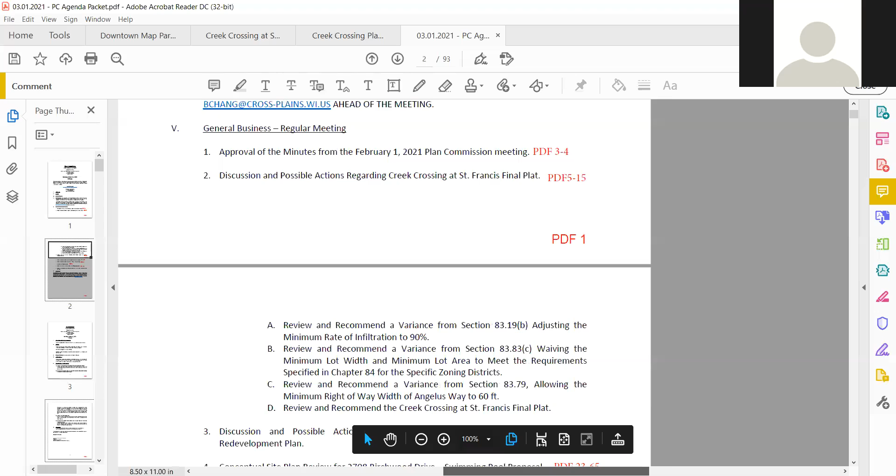Number 2, discussion and possible action regarding creek crossing at St. Francis final plat. We will go through items A through D individually, I think.

I can give a quick summary here regarding the submittal, and then we can go through each of them. As part of your packet, staff provided a list of items that do need to be addressed, but we found that the final plat was substantially in conformance with the preliminary plat.

That said, items 2A through 2C on the agenda are listed as variances. However, in speaking with our village attorney, I believe those are instead waivers. Our code doesn't differentiate between the two, but my understanding is there may be some connotation regarding that.

The final plat has been submitted for staff review. We've had an opportunity at the staff level to review the items, both the preliminary plat and the other submittal documents, including the developer's agreement, construction plans, and utility plans. As part of your packet, you'll see a list of recommended conditions or changes that staff recommends be fixed before approval at the village board level.

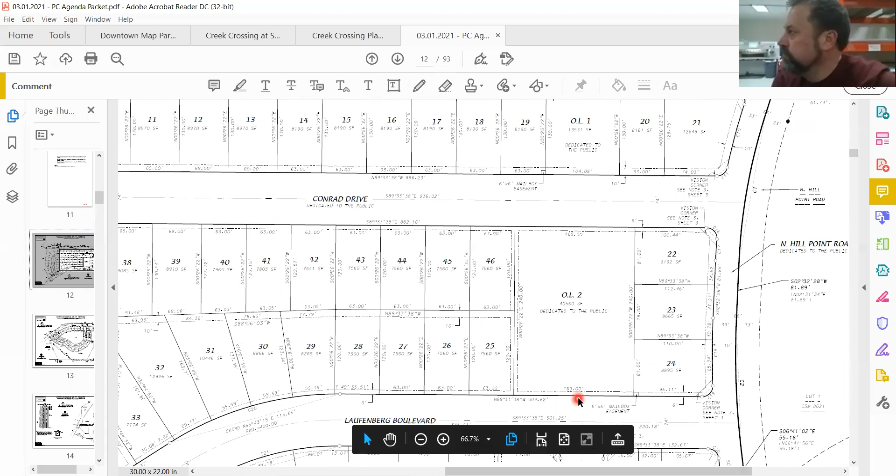I don't know, can I make a point of order? Can I say something? With what you're saying, Bill, aren't those developments zoned SR5, which means the minimum frontage is 60 feet, and is the square footage 9,600, or are you using the SR4? So the subdivision code minimum requirement is 9,600 square feet and 80 feet at the building. The SR5 district, I believe is 7,200 square feet and 50 feet width.

Oh, so this is falling into chapter 83 is what you're saying? So this meets the single residential 5 district, but it does not meet the subdivision minimum lot requirements. Oh, I did, okay. Sorry, I didn't know, I was just, thank you.

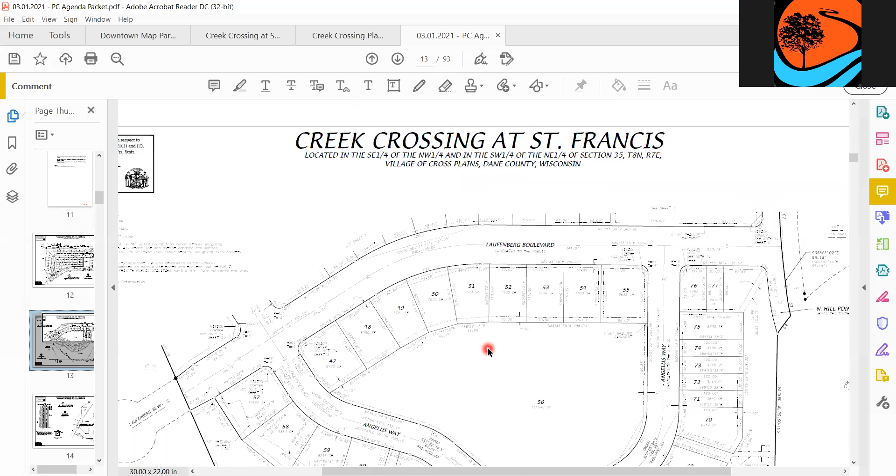Okay, Judy? I don't know if I can ask this or not, but I will. Is there any way that we know a rough cost that they're gonna sell the lots for? Like what we think a lot will go for?

Yeah, I don't know. We have Ron Kloss, we have Jeff Lee, and we have Vern Jesse on Zoom here. They may be able to address that question. Jeff or Vern or Ron, go ahead if you would like to address that.

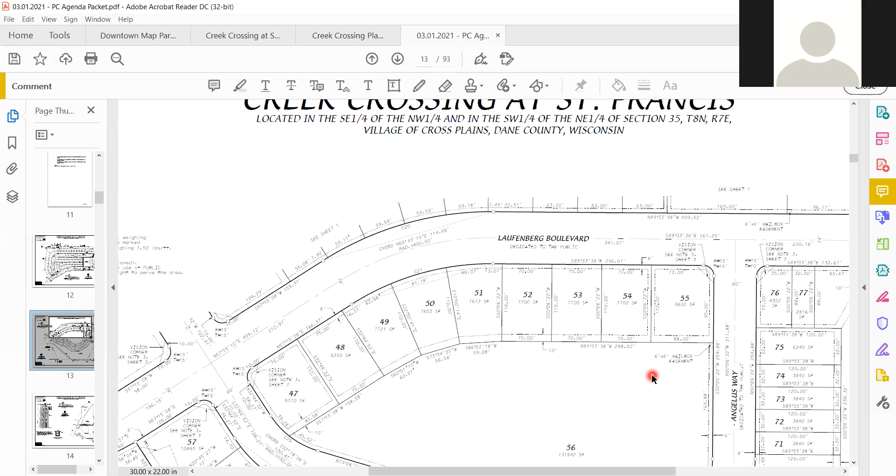Sure, this is Jeff. We are working through final pricing, but to be consistent with the market on a per square foot basis, these lots are suggesting they'd be priced in the low 90s to low to mid 100s. Thank you.

Anybody else? Comment? I don't know if that's classified as affordable, but I guess it's more affordable than the latest one that we just approved.

Yeah, I guess it's all relevant, but I would think with the setbacks and everything that'll be required, the houses will be smaller. I don't think you're gonna have a 4,000 square foot house put on this lot. It'll probably be more in the 1,200 to 1,700, maybe 2,000.

Which is really where the cost of the housing is. It also provides higher density. We get more people in a smaller area. It's good for the environment.

We do have Mike Slavny, our village planner, on here too, so he's available for any questions also. Wanted to know that. Anybody have any questions?

I don't object to the smaller lots, but is this something that should be looked at in the ordinance? I mean, if we're granting a variance to a lot of lots, maybe the ordinance ought to be looked at as to whether we're requiring too much square footage or frontage on residential lots. I agree, it's an inconsistency between the subdivision ordinance and the zoning ordinance.

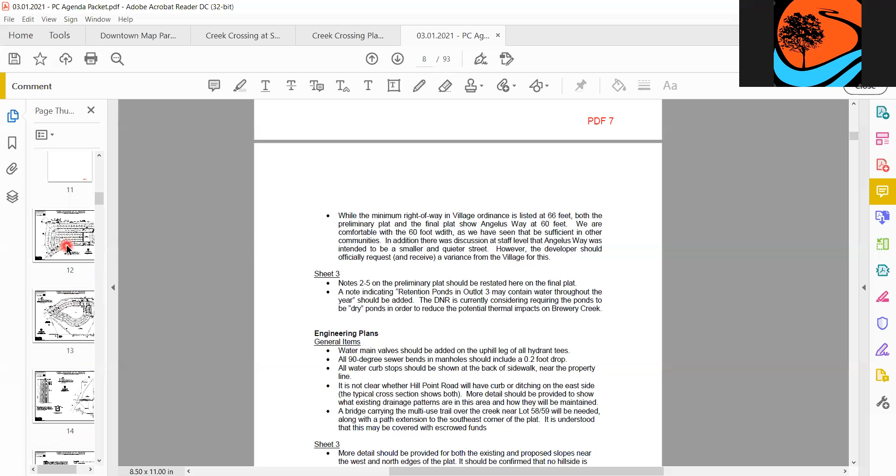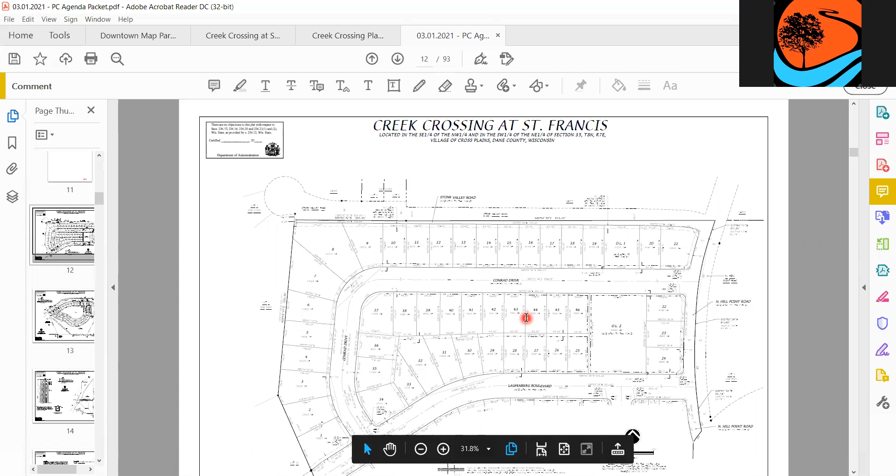Did you want to go through all 28 of those? I don't believe we have to. Brian Berquist, our village engineer, is here with us tonight, and so is Mike Slavny, our village planner. The packet did include the letter from our village engineer, which has been reviewed by staff, and we are in concurrence with that. I do have the plans and the plat, and I think the best way to do this would be to open it up for questions so we can get through this in a decent amount of time.

My whole thing is, I agree with all of these requirements they're asking here. I'd add that I know they mentioned about the retention pond being wet, but the DNR was talking about how they want them dry. But if it's going to be wet, and there's a chance of it being wet, I'd like that in the notes like we had on the preliminary plat. And I would like lot 56 to either be labeled or noted that it's going to be potentially multifamily. I do not want to run into what we've been running into where we're not clear on these final plats about what we're planning on doing. So let's get it on there so people know when they buy the lots. So those are my three things. Anybody else?

This is Kevin. I have the same thing about lot 56, so thanks for bringing that one up. I wish we could take it further, but I don't want to go backwards here today. I think we have to address it. I don't know if it's also addressed in the covenants, which get handed out to each home buyer, but if not, it should be, as well as the plat map.

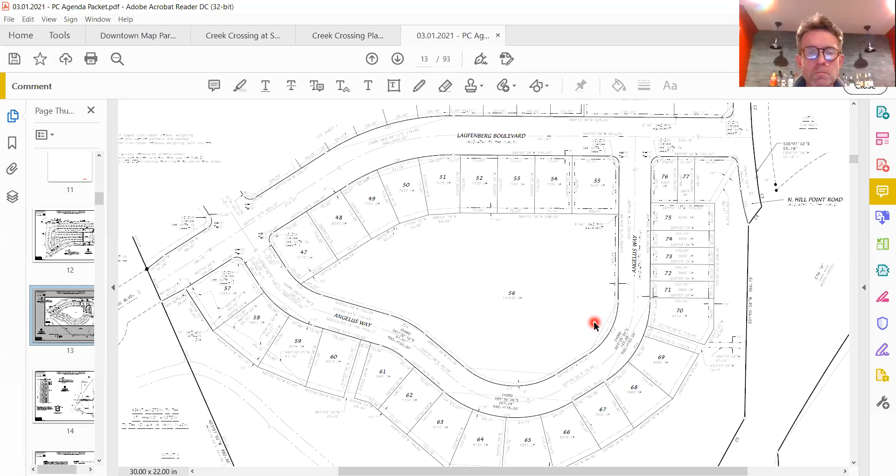So a couple of questions. Also, I had the DNR one - there you go. I'll skip some of the other lesser questions. Oh, and I'm going to mention on sheet 3, PDF 8, no construction traffic will be allowed to enter via Laufenberg Boulevard. I just wonder how that's controlled. So that's a question seeking an answer.

And I would agree with Michael's assessment about the traffic circle and decorative stone, trying to get something in there that's maybe a little nicer than decorative stone. I do understand it may be a hassle, a little bit greater burden to maintain, but I think it's worth it. And then I had a question about some sidewalk connecting - oh, never mind, I just want to reiterate connecting the sidewalk.

And that's it. Anybody else? Go ahead, Kevin.

Michael brought up the stone on the terrace. Could you answer that question, or the first one? You want to answer these questions before we move to the next one? That's fine, I was going to let them do them all at once. Oh, all right, sorry. No, that's all right. Okay, go ahead.

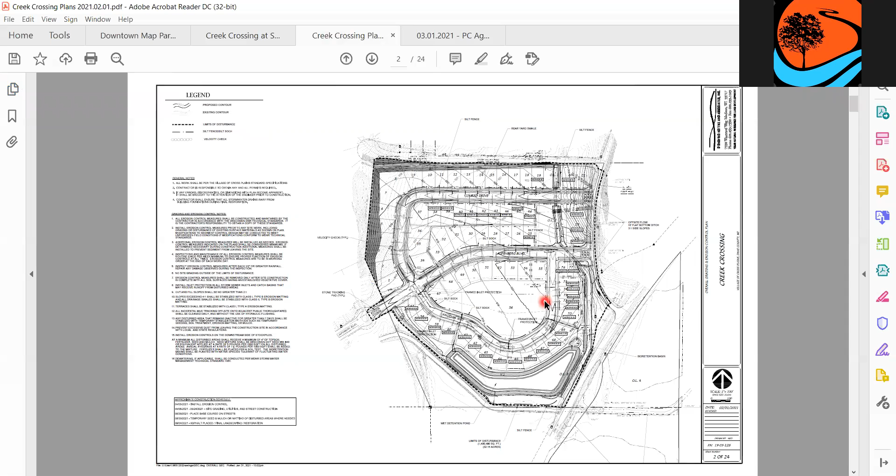Jay, would you like me to answer that? Go ahead. Go ahead, Ron, this is Ron Kloss. Yeah, this is Ron Kloss with D'Onofrio's.

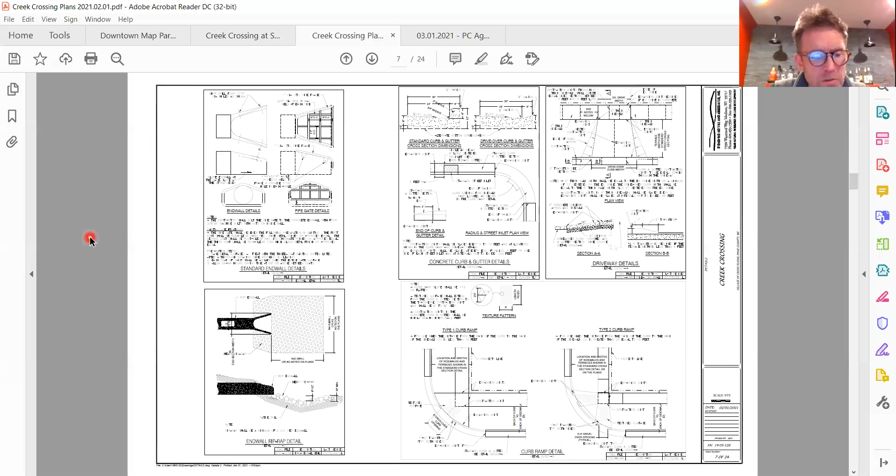We're doing the engineering for this project. The ribbon curb is a different design than what the village has used. In our discussions with village staff, Jerry Gray and Brian, there was concern that cars, as they parked along the road, would pull off beyond the ribbon curb and into that terrace area and rut it up. So we proposed a shoulder beyond the ribbon curb to help prevent that rutting. But our intent is to sprinkle a little topsoil on top and grow grass right up to the ribbon curb, so there's no actual gravel showing or to maintain. It's there as a base for when cars would pull off beyond that ribbon curb. So that's the basis for that design.

On the traffic circle, we're wide open to building that however the village prefers it. So just let us know.

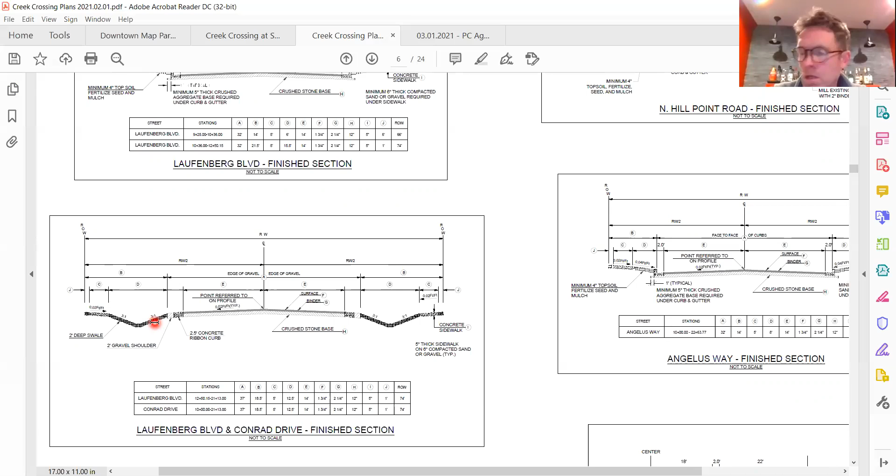And then as we review Brian's letter and those items, we don't have any problem taking care of those, other than we'd like to discuss that centerline radius on Conrad.

We are proposing a 100-foot radius on that curve instead of 150. The reason we went that direction is, as you look at the outside lots, they're already very deep on that curve, and lot 37 has a decent shape. If we go to a 150-foot radius there, it shifts the street 20 feet in the middle, so it would take a big whack out of 37 and make 7, 8, and 9 even deeper and more, I'll say, snouty. Those outlines would be extended, especially between 7 and 8 - that'd be another 20 feet long.

And we look at speeds here - to me this is really no cut-through traffic, very low speed. So we'd like the village to consider a variance on that. By the way, this is not a change from the preliminary plat, but now is the time to analyze it and decide.

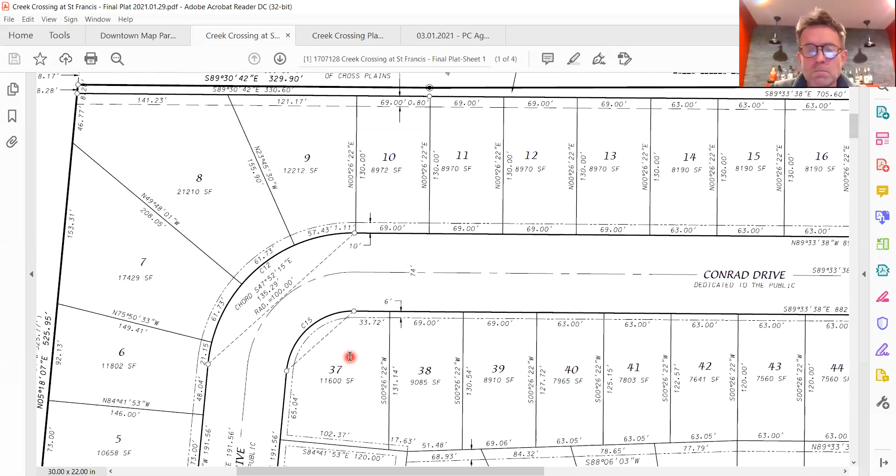What we had anticipated is that there would simply be barricades brought across the entire stretch during construction to prohibit errant deliveries or the random truck driver from using that. The intention of the comment was more to not put a stone tracking pad there, which would further differentiate that from an actual entrance. So that was the intention - there would actually be barricades placed there and not have a stone tracking pad, which you would normally see at a site entrance.

Okay, thanks. I guess then I misinterpreted - I mean, this is construction during development, Brian, you're talking about like roads and sewer, and not during home development. Is that what I'm hearing?

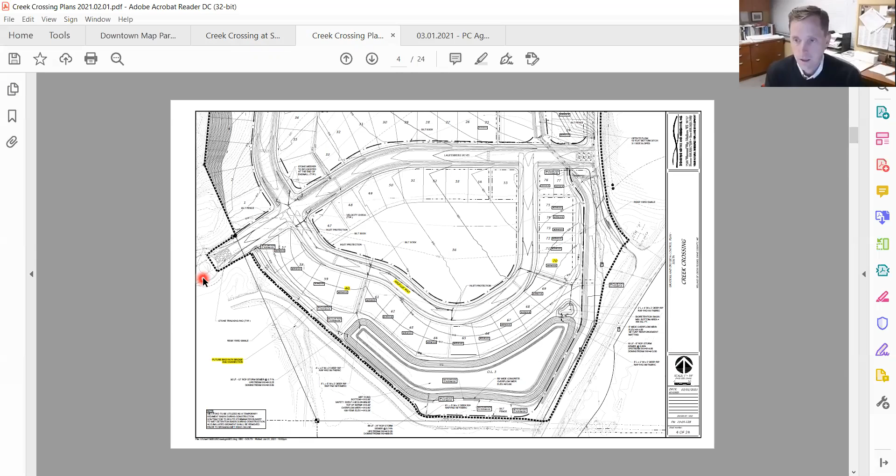Yeah, I don't know how you'd prevent it during home construction. But I was wondering, okay, infrastructure construction - could we just clarify that it's development of the subdivision and not development of homes? During construction of the subdivision and not during construction of homes? Because I think, I don't know, maybe I'm not the only one that was confused. Sure, thank you.

Anything else? Okay, Todd, go ahead. Well, there's the gravel on the side of the road. That's what I was asking about. Oh, okay, so you understand. If it's gonna be covered with dirt, we're assuming the homeowner will try to keep it up. I think that's a good idea. I think we get a lot of calls if there's ruts in people's yards there, they have to fill them in.

All right, any other questions on this? Hey, I guess Jeff, Ron, I just want to make sure when this comes to the board, all these points will be added, this will be all modified, so we aren't having a million contingencies. That's three weeks from now.

Yes, Jay, that is our plan, and we also plan to incorporate the desires we learned from the DNR on the stormwater ponds. We hope to have those incorporated in the plans as well by the village board. Again, the only item that remains in our minds is this radius question.

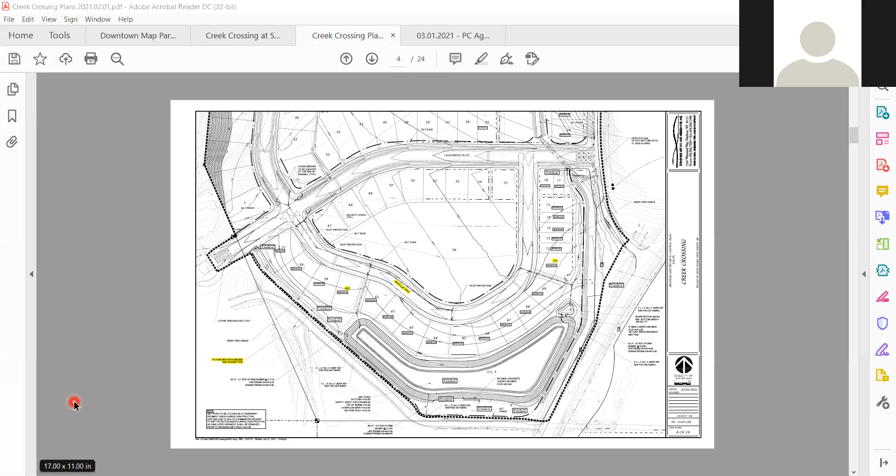And since that is not a departure from the preliminary plat, is this something the plan commission should discuss? Should we work through it with staff? What's your desire on the radius question? Well, that's good, because if that's what we're left with, I think I'll just go around and see what people's feelings are on it, so we have some idea. Everybody's, Jeff? I mean, Kevin?

Yeah, I leave it to engineers, really. I'm having a hard time trying to decipher what it would look like live, other than my hope is that it would possibly keep people moving slowly. And then secondly, I remember what lot it was on the corner, the inside corner there, that there be some sort of restriction against putting up trees or other obstructions in that inside corner, so you could see around it. We don't have to deal with what we're dealing with over here.

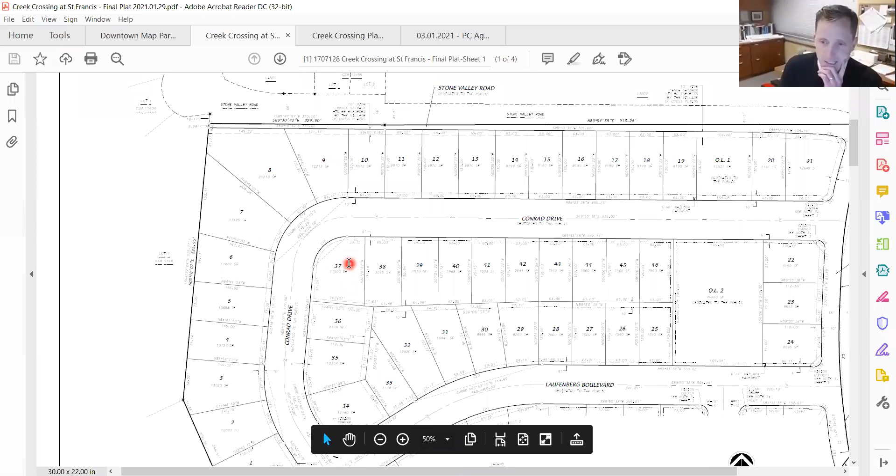Yeah, lot 37. Lot 37, thank you. So I don't know what that dashed line means, but it seems like that could be similar to a no tree, no structure type zone. Yeah, that dashed line is just a geometry feature called a chord that connects the two ends of the curve. But to your point, the village does have a vision requirement at all street corners already.

That is an excellent point. It needs to be kept at the forefront, but you already have, I shouldn't say vision corner, you have planting requirements on corners as well in your code. But we can certainly add that on the plat too, as Bill is showing it right here.

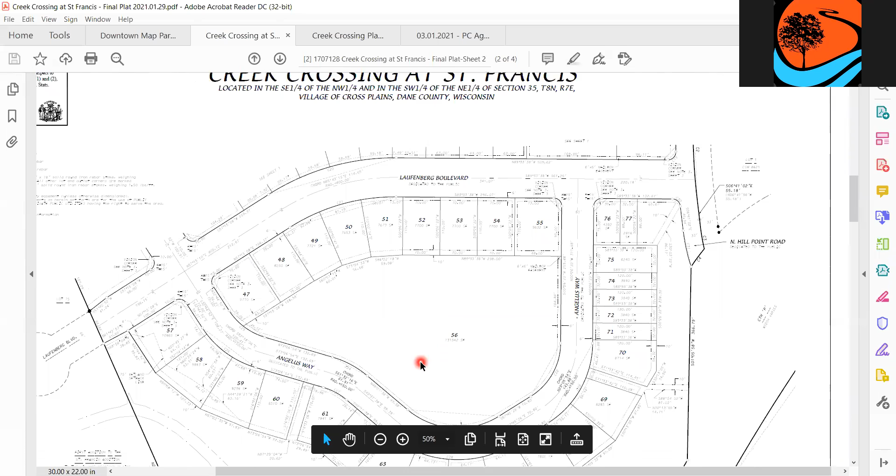All right, Cliff? My concern would be whether or not, like emergency vehicles, if there is parking on one side of the street, that if in fact a case happened where one of the larger fire trucks or pieces of equipment need to get into that area, is that a concern? And I would want someone from the village to acknowledge whether it's safe or not.

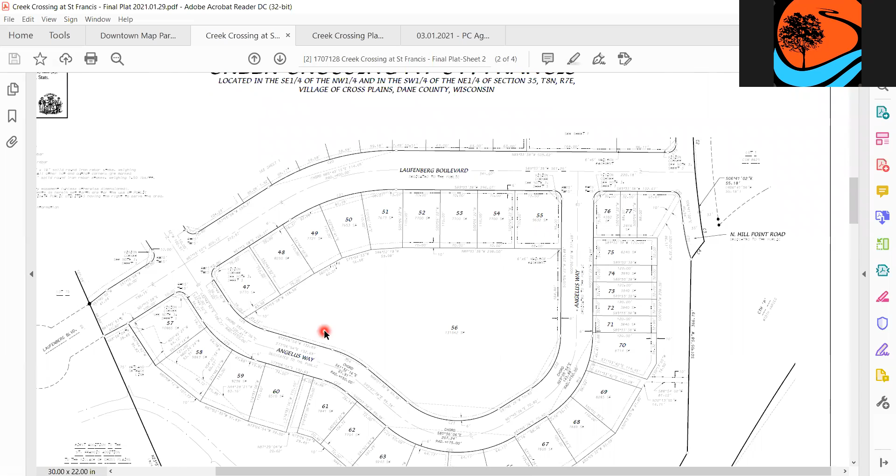Right. But we're only looking at parking on one side of the street on Angelus. That's Conrad. Oh, they're, technically, so that, okay, that technically could have two cars on the sides of the street. Well, technically it's a corner, you have to be 20 feet from each corner. Okay, but anyway, that's a different story. I think what Cliff is looking at, the road is still 66 feet, it's just, you're talking about kind of a truck, a sharper radius. Yeah. All right, I don't know, we'll have to check into that, that's a good one.

Randy? I'm all right with the 100 foot. I like the idea that it might slow the traffic somewhat, which has been an issue we've talked about. And so I can live with the curve, although I think the idea about the emergency vehicles is a good point.

Todd? I'm fine with it, it'll slow them down. All right, Judy? I'm good with it, slow it down, but that's a great point, that's a great point. Well, it looks like I'm agreeing with everybody. As long as emergency vehicles, especially fire trucks, can make that curve, it sounds like we're pretty much okay with that. So I don't know who actually makes that call, Bill?

Yeah, so the process for a waiver does require, from the subdivision ordinance, a motion by the planning commission recommending it to the village board. Right, but I don't want to recommend it until we know, I guess we could do a contingency, but who actually can make that determination? That would be an engineer, right? Yeah, we had an engineer and or also the fire department.

We have seen in other communities where their minimum radius is 100 feet, like in Dane County. So it was more to call that to the Plan Commission's attention that that's what your ordinance says. But we do work in other communities that allow 100-foot radii, and it does work with emergency vehicles.

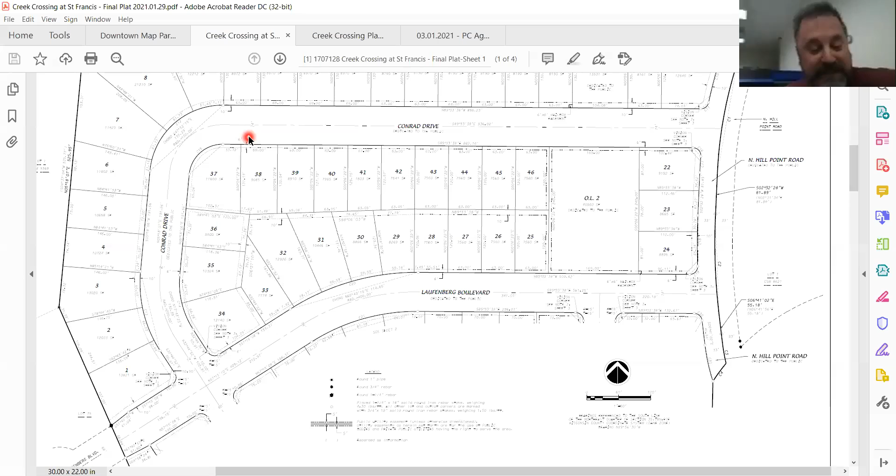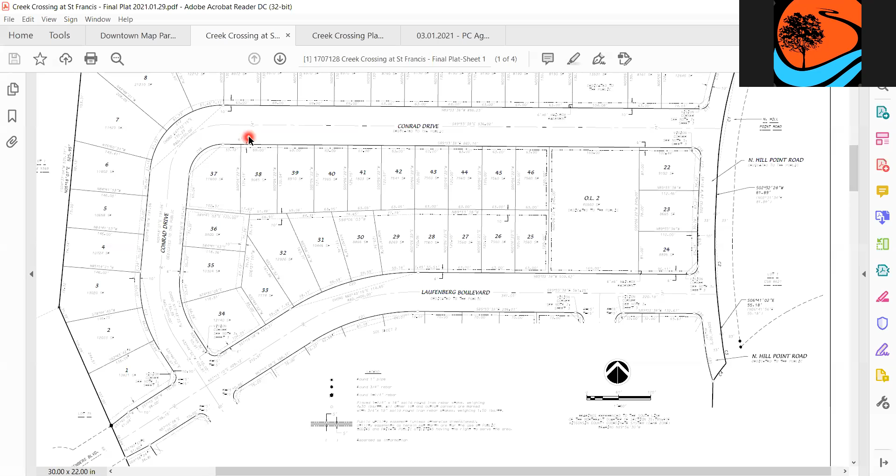Commissioner Padre? Yes. Eric, did you have any questions or comments? I do not, I don't have an opinion. Commissioner Zander? Yes. Trustee Lucius? Yes. Trustee Campbell? Yes. Commissioner DeQuinn? Yes. Commissioner Case? Yes. President Longo? Yes, and sorry about not hitting you, Eric. That's okay, I had nothing to add.

All right, is there anything else we need to do? Jeff and Ron, you're gonna do something with lot 56, either putting it on the plat or doing a note? The plat already calls it out as being likely 8 unit per acre density, but if we want to add additional comments, we can. Okay, are those comments in one of the other documents, or is it gonna be a note on the final plat?

At this point, it's a note on the final plat. Oh. Okay, that's good, I couldn't find it on it, but I might be missing it. But okay, very good. As long as it's somewhere on there that we can point to in the future that's what it was gonna be.

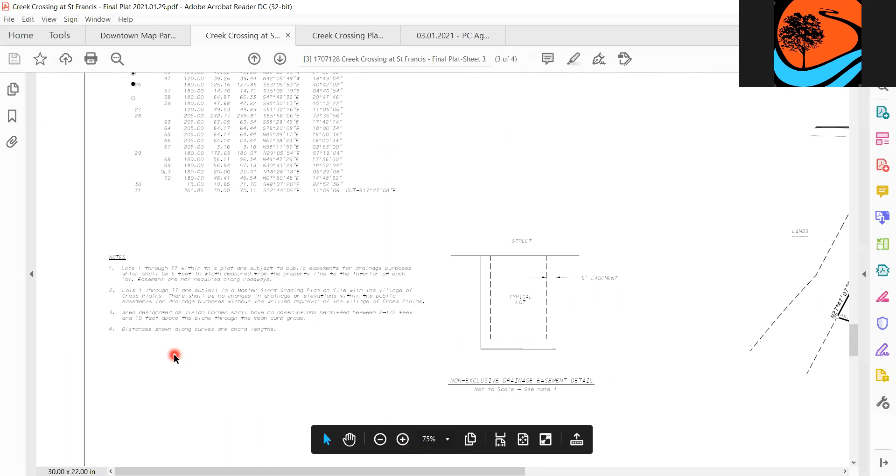Bill, can you, I know it's a comment on the preliminary plat. I assume it's followed through into the final plat, but we will make sure it's on there. Okay. Yeah, we can see it on the final plat. There's a couple more notes that weren't followed through on the final, so we can work with that.

All right, Bill, is there anything else we need to do here or anything else you need? No, I think that answers all of our questions. And so the action that we'll need from the planning commission will be to recommend it with these fixes. All right, do we have a motion?

So moved. Second. All right, I have a motion. I'm just gonna say what the motion is: to recommend approval of Creek Crossing at St. Francis final plat with all the stated additions added. Is that addition?

I guess it's my motion, so I can comment. Yeah, I just want to make sure that, I mean, there were a lot of issues that Town and Country Engineering found, and I guess I'm presuming they're all addressed. So my approval on this is that those, in fact, are taken care of.

Yeah, so what we're gonna do here is, if it is recommended by the planning commission, work with the developers and get it on to the final plat before it's presented to the village board. We would not present the final plat to the village board unless these items are in there. All right, I just want, because the recommend of the final plat that we have, those are not on it, so I just want to make sure that they're gonna be on it. Yeah.

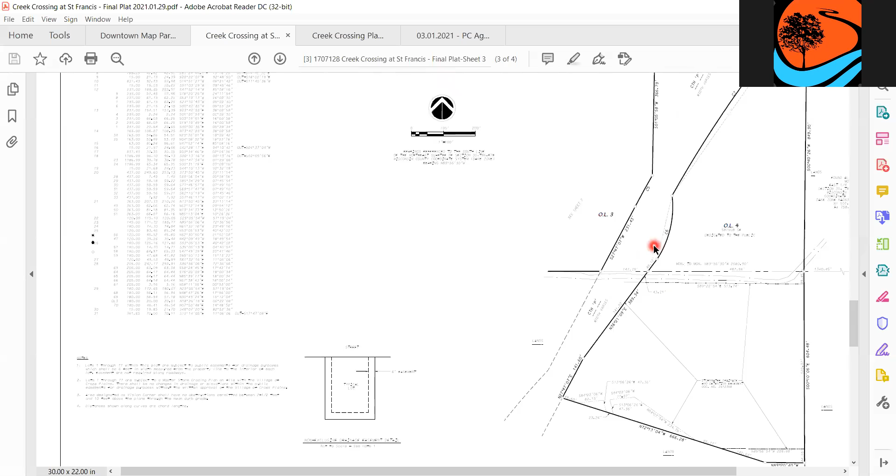I think we're kind of getting deep into the weeds, because I thought we pulled this out of the final plat, the circle. I thought that was an individual item, you know? I know we talked about it at one time, it's not part of that development, they're just gonna do it. Yeah, so the construction of the circle itself is not part of the final plat. It's part of the design plan. Okay, need to differentiate between the two.

In regards to the plans, and Brian can step in here, but we're pretty close on those things. The items in the street and utility plans can change and have in the past changed, because of items that we don't foresee, and if they are large policy decisions to be made, we'll bring the final street plans and construction plans for review. But whether it's pavers in the circle or whether it's grass in the circle, that's something that we can make a determination on.

Right, I'm trying to keep this clean, so right now we're just talking about the final plat. That's something outside of that, I don't want to confuse things here. I was just confused because it was on the construction drawing inside. Right, no, we can bring it up, I'm just saying right now what we have in front of us is the final plat, so we don't have to deal with that right now.

Well, I'm sorry to get it messy, but I do want some clarification, because we passed it with all the recommendations in Brian's letter. Brian's letter specifically states the traffic circle and trail be either decorative stone, pavers, or colored concrete. That's in his recommendation. So we're saying if the final plat passes, as long as they make the recommended changes, that's one of the recommended changes? Well, that's not how I'm reading it.

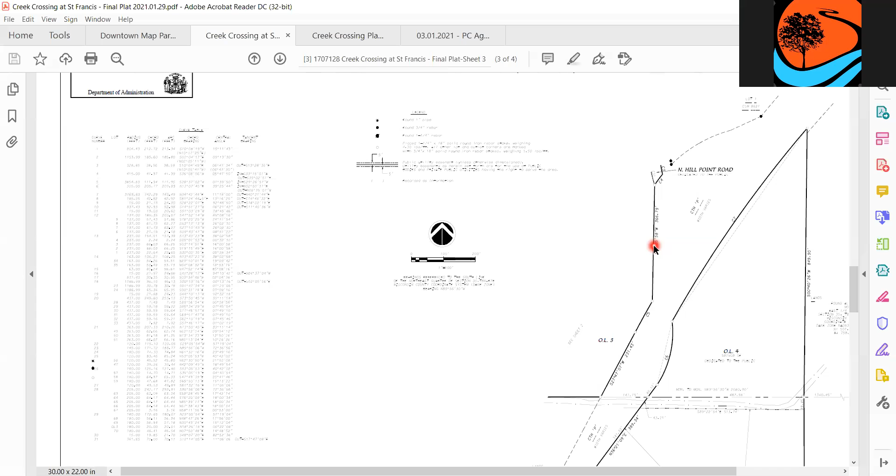We are going on to number 3, discussion and possible action regarding 2100 American Legion Drive concept redevelopment plan.

Want me to provide a presentation on this first? Sure. So this is a project located at 2100 American Legion Drive, on the corner with Main Street here in Cross Plains. Property owner is Tom and Robin Rockus.

They are here also with us on the Zoom meeting. They have proposed a redevelopment for this property. The very top floor, the second floor, would be an Airbnb-type setting where they would rent out to up to 6 people. Main floor would be an entertainment space or assembly space intended to fit up to 99 people.

They are also proposing a 10 by 25 foot deck over the lawn area that faces American Legion Drive as part of their entertainment space. As part of the packet, you do have the site plan and floor plans for each of the floors. The first one is the top floor, and you can see bedrooms and studio space. The second drawing here would be the main floor with assembly space, bathrooms, and the deck. And then the lower floor would be for the business and storage.

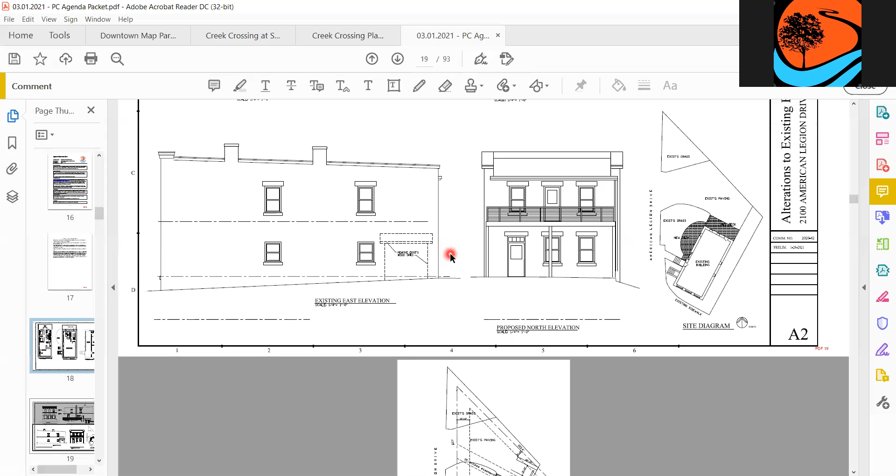When this plan was reviewed, or this concept was reviewed by staff, generally it would fit the Main Street business and architecture. However, there were questions in regards to parking and being able to access the site. You'll see here that the property owner has submitted two concepts for parking arrangements on the private property itself. So I'll let Tom and/or Robin take it from here and provide where they are at with this, and then the planning commission can take it from there.

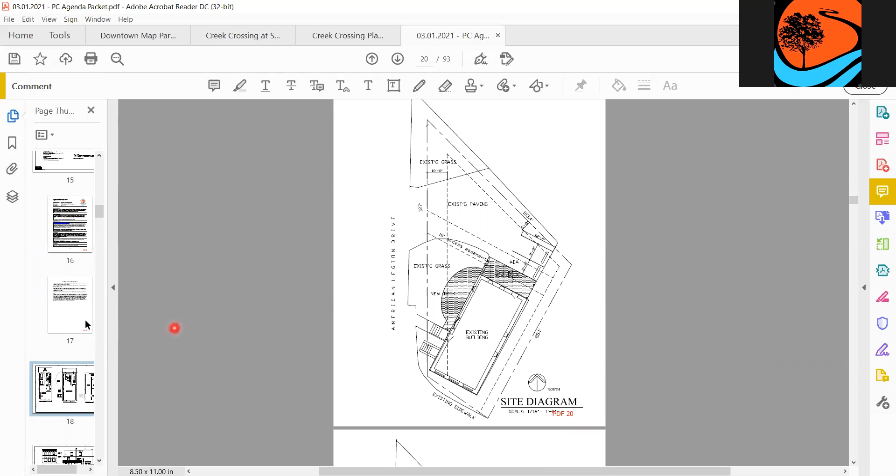Tom or Robin, if you want to go ahead and unmute yourself, we can have you get started here. Sure, yeah, hi everybody, I'm Tom. Robin Rockus over here to my right. Bill summed it up pretty well.

I specifically, well, we would just mention parking. I did give two options, because one is if we are required to back up to do a U-turn in the property, as she's showing here, this would somehow - the architect said this would be a Y-turn type exit. And then the other one shows kind of how the building has been used, where people just back out. And then it would give us an option to use this patio area here, which we would hope to do.

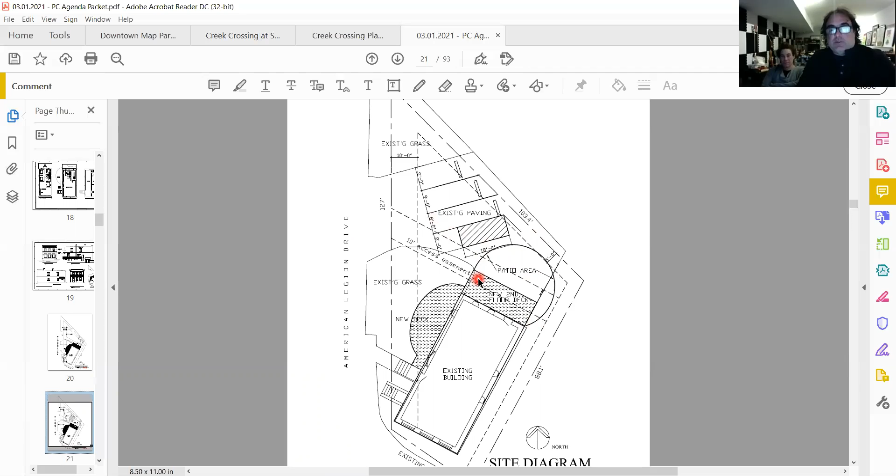So we were hoping to be able to use this version because it seems it would just be more appropriate. The other version would have one space with one ADA compliant space, so that kind of leaves us with one space. So we might just waive that if we're stuck with that, waive parking. I'm not sure what else, if anyone had any questions or what you were hoping me to address, Bill.

Sure. Mike Slavy is also on the line here, Mike and Jerry Gray, our director of public facilities, Brian Berquist, our village engineer, in regards to concerns with parking in this area. This does get congested. American Legion Drive is one way through this section here, going from south to north. And then 1909, right next door too. So we have heard in the past complaints about the traffic congestion here in relation to parking spaces. I guess the big concern here is an assembly space of up to 99 people, plus your Airbnb of additional 6. Question becomes where do they park?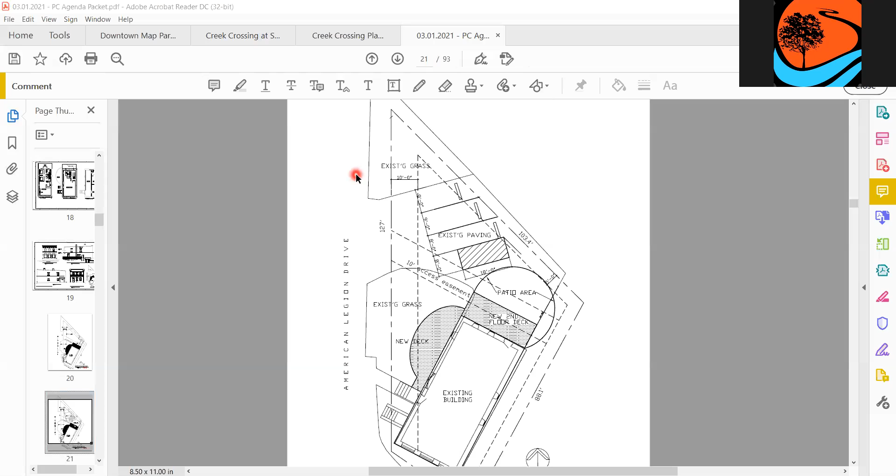Sure. We have thought about this quite a bit. So it's up to 99 people, that doesn't mean that our events will regularly have 99 people. We're going to be starting out with smaller events, and if we were to have, let's say, maximum capacity for a wedding or whatnot, we would encourage our clients to use a shuttle from, say, a hotel in the business park there in Greenway, and then have them shuttled to the event.

I did drive around recently and kind of eyeball all the parking spaces around the memorial, the Veterans Memorial, and just the streets in general. And it seemed like there was quite a bit of parking actually. So I was kind of relieved to make that assessment.

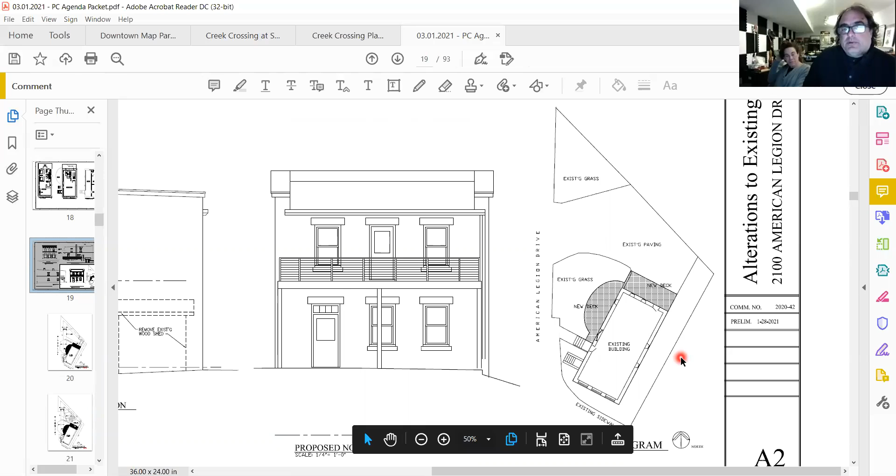Yeah, so we're concerned about parking for the bigger events, but I think that we're still going to be okay, and with weddings and whatnot, I think we would be utilizing shuttles and other creative ways of getting people there, so they won't be bothered by not finding parking. Even though I think there's enough parking, honestly, for me to walk. I can't speak for everyone else that might want to walk from the back end of the Veterans Memorial. But I think there's quite a bit of parking up and around that area.

Okay, does anybody have any questions? How much parking would be required by ordinance for this use? So in a Main Street mixed use district for which this property is in, it does not require any off-street parking. Off-street parking is waived. The proposal for this development would be coming in as a planned development, which would require a zoning amendment with the Main Street mixed use as the base zoning for that. All right, Judy?

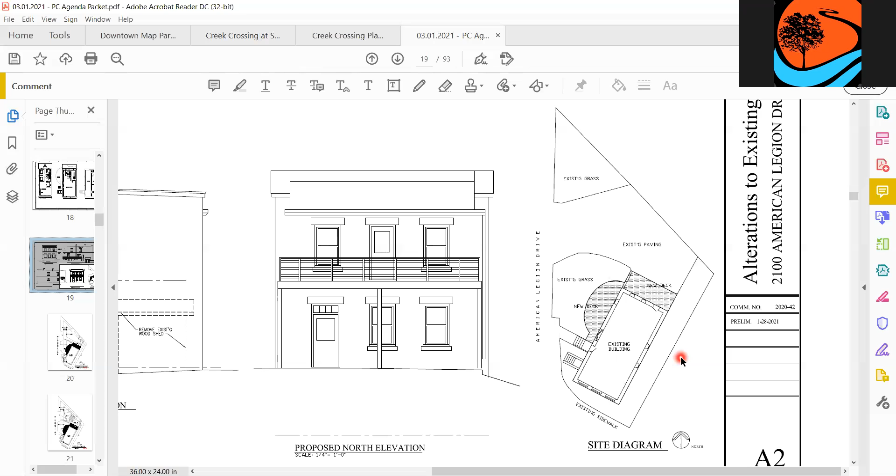Personally, I thought the same thing when the wine bar went in there. They didn't have a lot of parking either, but people find it. People walk, people get there, and they do great. So I feel like this is kind of the same thing, if we did it for them. This is just across the street.

I guess I got a couple comments on the parking. What I guess I would do is reach out to the Legion post there. And when you have events, maybe have a deal where people can park in their parking lot, because like you say, it's only about a block and a half. So that would be something that you might want to do, is work out a deal with them. That would give you probably 20 spots or more.

And then the other is in your letter, you have the top floor listed as bed and breakfast, and then in the memo it was an Airbnb. And I thought at our last time we talked about this, that if you classify it as a bed and breakfast, you actually have to serve the breakfast part. And I know there's restrictions on how many days for an Airbnb. I think your concept is great for short-term rental, I'm just not sure why we're not going with something like that unless something has changed. Just wanted to clarify so you don't get stuck on something like this.

Yeah, I appreciate that. We did go over that, and that's not the most updated version of the document, but the most updated version does refer to it as a short-term rental, like a vacation rental house or an Airbnb. So yeah, we won't be pursuing the bed and breakfast. All right, very good. So I want to add a couple comments here. So once it does get past the conceptual stage, that would be required to submit an application which would verify exactly what they desire to do on the property.

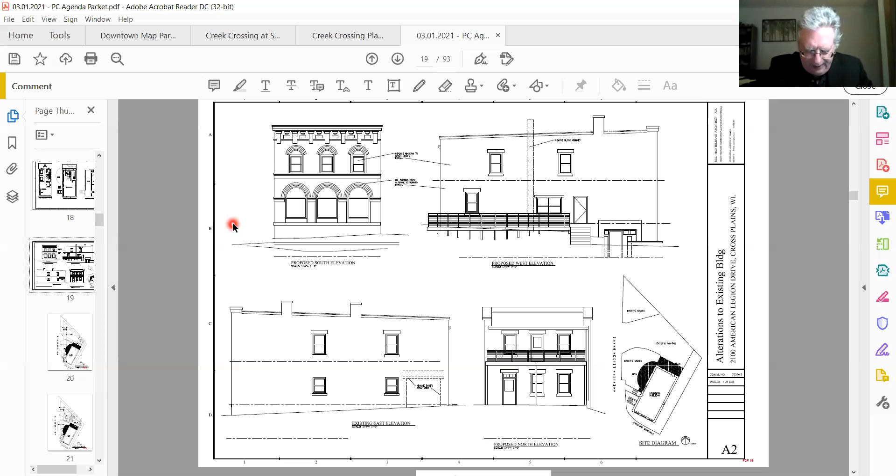I guess I'll comment, we have lots of people who back out onto Church Street and other streets that have far more traffic than this road. You can only go from Highway 14 to Park Street, you can't go from Park Street on American Legion onto 14. So you've cut almost all your traffic. Really, the only people who turn there a lot of times are the ones going to the post office, because they can get in there. So I think the traffic is extremely minimal there.

Backing up is always more unsafe than coming out forward, so that's a given. The question is balancing the positive of having the parking spots and backing out versus having half as many and going with a wide turn.

Okay, I guess we've got Jerry, then Brian, and then Kevin. I'll go next. I don't really see a big problem with the backing out.

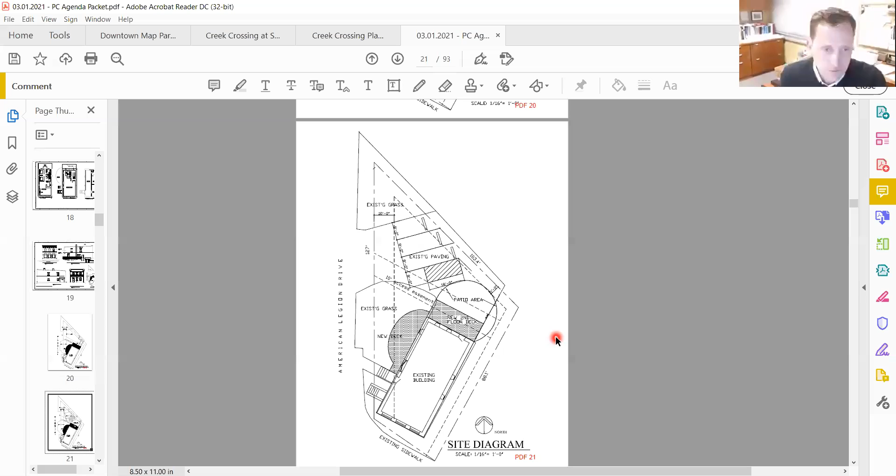I don't have anything to add on the parking. I agree, I don't think it would be in sufficient volume or speeds to cause significant problems. Thank you, Kevin. I was just going to point out it's three spots too, and presumably restricted to whoever is staying there, or somehow restricted. So I think the traffic is infrequently going to be backing out of there.

All right, so what action do we need since it's only conceptual? Comment? Yeah, go ahead, Aaron.

I just think this is kind of an exciting thing to have another one of the old historic buildings on Main Street get some time and effort put into it. I'm glad that Tom and Robin are making the effort to try to get a business going there. As far as our Main Street goes, I think we're gaining a little momentum and starting to have some cool stuff on there. So I greatly support this project.

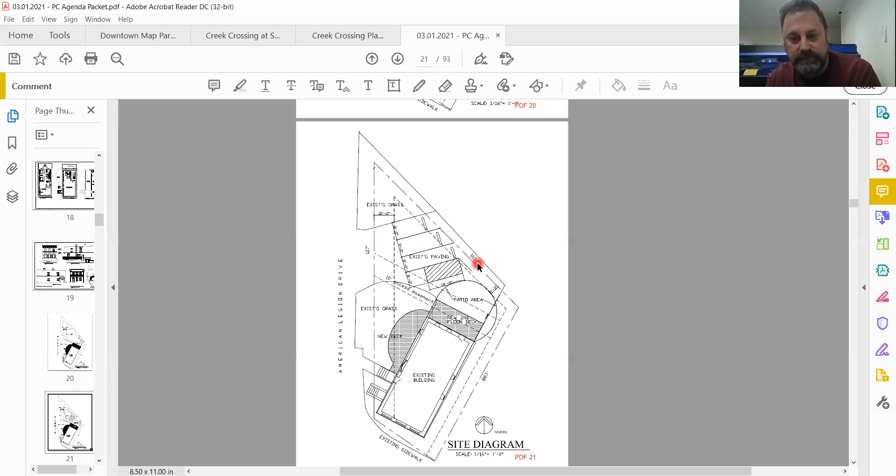Okay, do I have a motion? A motion. All right, do I have a second? I'll second. All right, I have a motion and a second. Any other discussion? All right, all in favor, say aye. Aye. Opposed, same. So moved. All right, thank you very much.

All right, let's go with conceptual site plan review for 2708 Birchwood Drive swimming pool proposal.

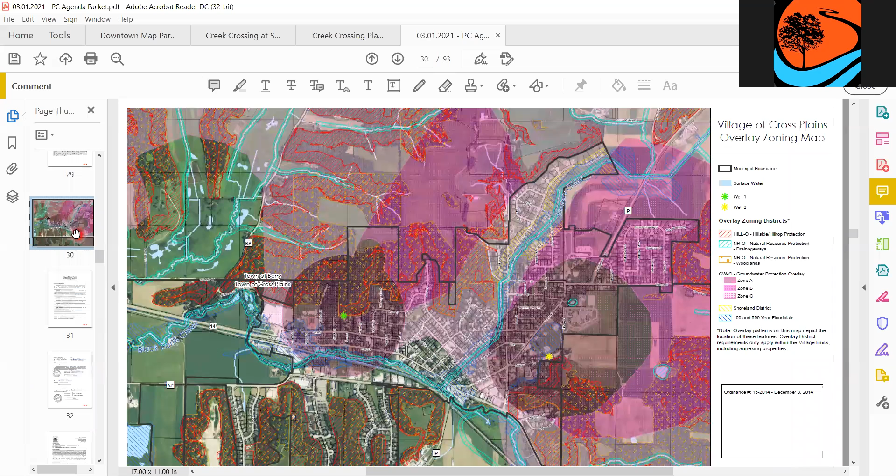I will first start off with the location map of this property so that everyone is on the same page. This property is located in the southeast section of the village, and this property is co-zoned, meaning it's got two different zoning districts. This portion here is residential, and this portion is hillside and conservancy. The whole property has a hilltop overlay on it.

There is some significant history regarding this property, in that there was an initial developer's agreement in, I believe, 1996. The property actually did not have a home built on it until, I believe, 2014. For that development, or the construction of that home, the property owner was required to obtain a conditional use permit to construct a residential home.

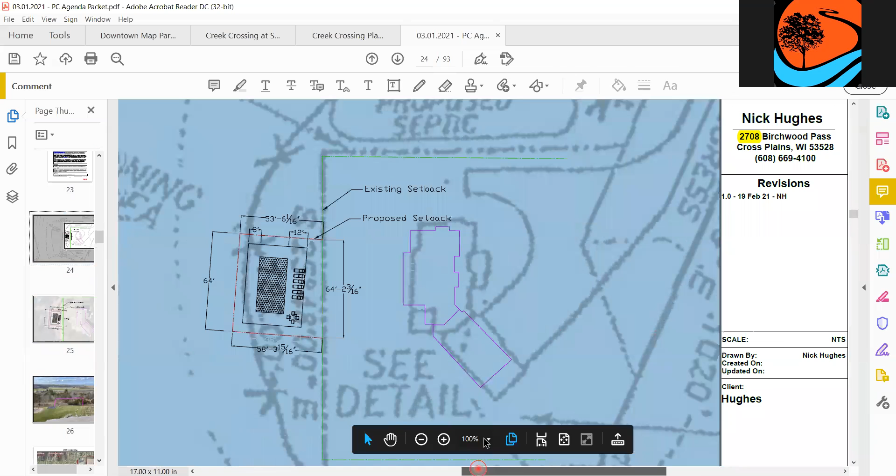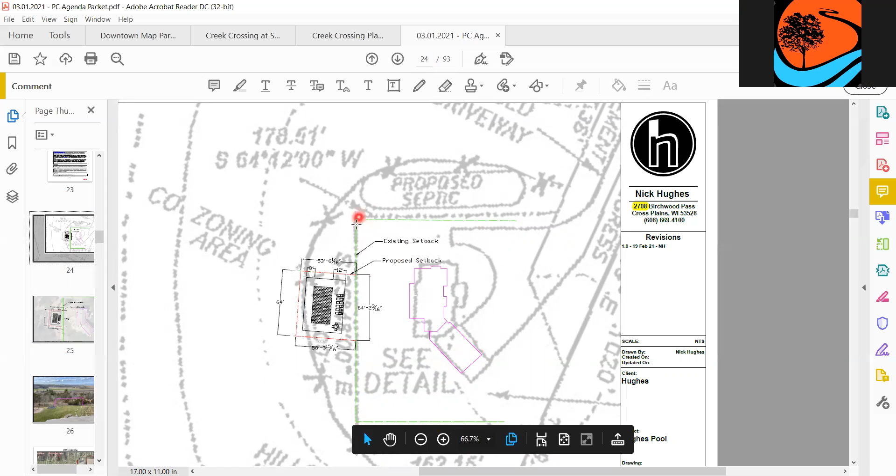So here is the current site plan, which is hard to see, but this highlighted in purple is the home. This green line is the boundary between the two zoning districts, so everything on the east side is residential, and everything on the left-hand side of that line is conservancy. Okay, so where's the hilltop overlay, what does that cover? The hilltop overlay covers the whole property. The hillside protection preservation line is outside of that area, so that comes along this section here.

And so the property owner is asking, or would like to construct, obviously, the swimming pool outside of the residential area. In our zoning code, a swimming pool, or residential accessory uses, would not be allowed in the conservancy district. It would be allowed as a permitted use in the residential district.

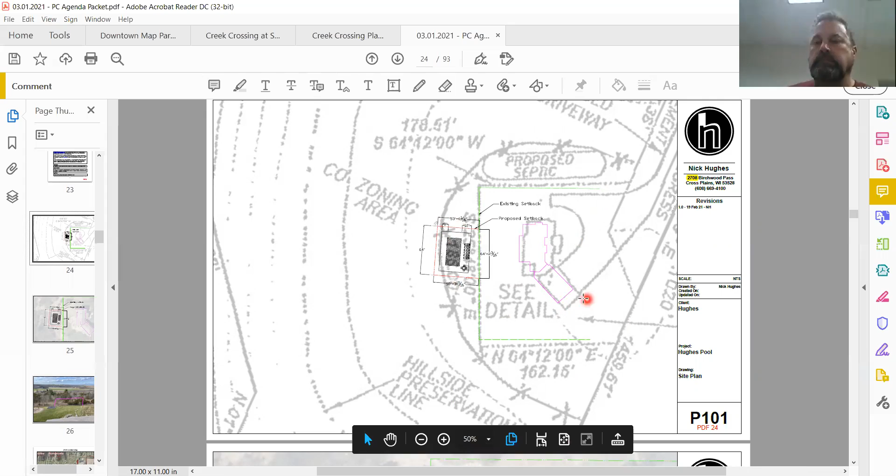So first and foremost, I think the question here is whether or not the planning commission, and eventually the board, would even consider something like this, where the applicant would likely need an amendment to the zoning district to make this work, an amendment to the conditional use permit because of the site plan, an amendment to the developer's agreement with the site plan, and then also an amendment to the comprehensive plan, which designates this area strictly as represented by the zoning district of the zoning map.

We do have a property owner here, Nick Hughes, and we also have Mike Slavny, who can talk a little bit more about the zoning. My recommendation, as staff, because this map is rather old and things change, is that we'd like to really identify what exactly is hillside and what is not in the current state, to make a better assessment of whether or not that swimming pool can be located outside of a residential district, and whether or not a rezone would be proper in this situation.

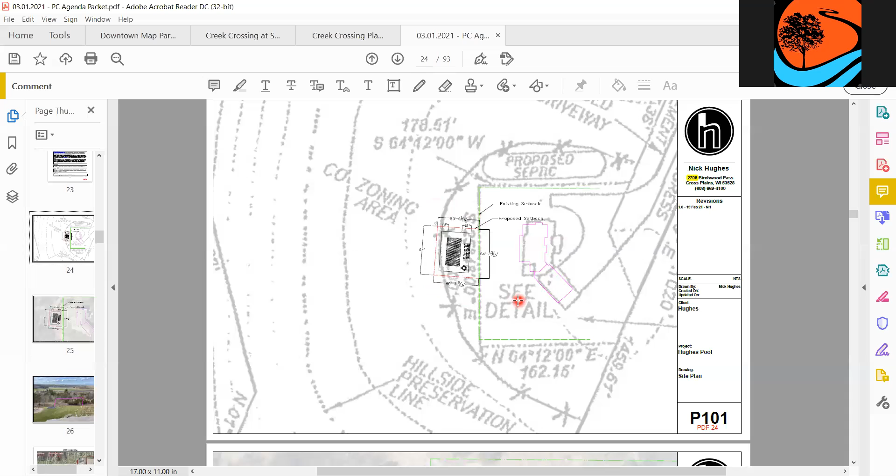Can I just ask the landowner one question? I guess I'm wondering why the pool couldn't go to, I'm not sure if I'd call it the south corner. Yeah, right in there. Is that where your septic or something is? I mean, from what it looks like, there's room there.

So the area we are attempting to do it in, that's actually quite a significant hill leading down from the house there, and would require a rather large retaining wall and a smaller pool. Where you see the play set, the actual line kind of cuts through the yard there, so it would need to be up by the house and would require like 4 or 5, or 3 tiers of retaining walls, I believe. So the hope was to find a more level area that wouldn't require as much disruption to the landscape. Okay, thank you.

Any other comments? Hey, Todd.

I don't have a pool, never have, but my understanding is we have to worry about rain and the chlorine runoff when the pool gets over full. Is there a plan on how to handle that in what is technically conservancy land?

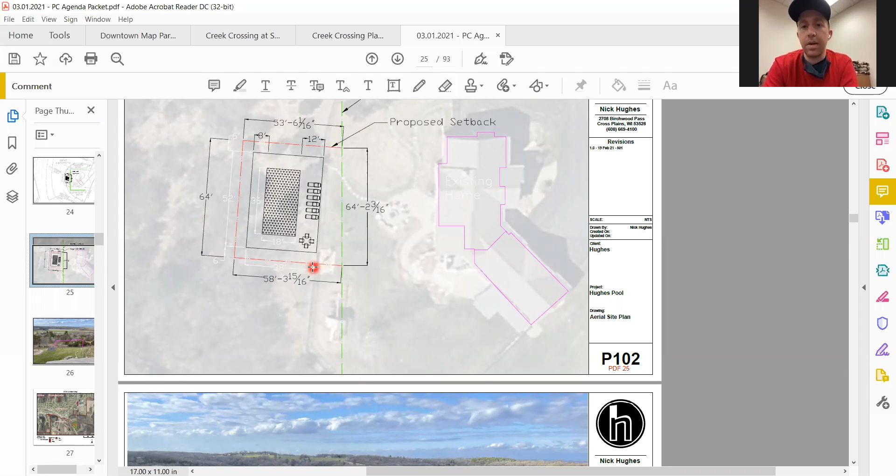We are still in the initial phase of getting drawings from a pool company, but the ideal would be to have a standpipe that would allow us to pipe it back into a lower infill area, or we would just use a normal pond drainage pump to do that. There's significant area space available that doesn't flow downhill on the hilltop that would allow normal soil filtration through topsoil if needed.

And I want to note that because of the requirement as a hilltop development and the hillside hilltop overlay, it does require an erosion control plan and stormwater management plan.

I'm more worried about the chlorine itself. Yeah, the chlorine itself too is actually going to be a much lower concentration because it would be a saltwater pool. So it's not going to be your typical commercial pool with really high levels of chlorine. It's going to be using a chlorine generator, so those levels are going to maintain a lower ppm than normal.

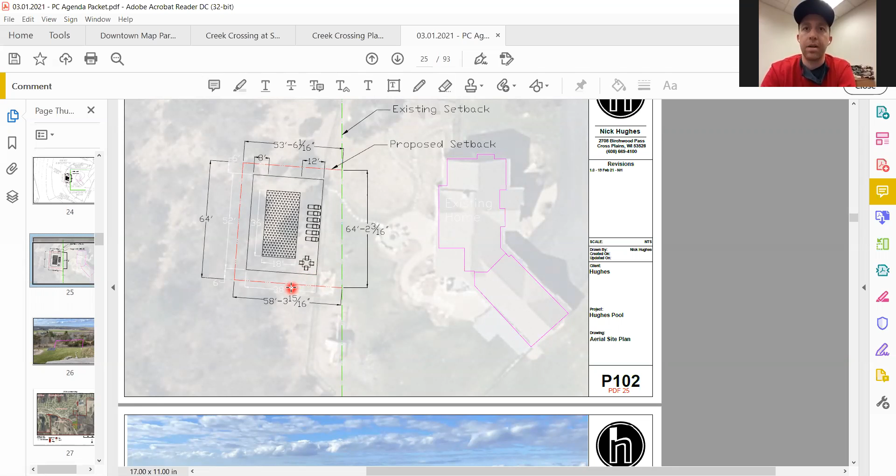Kevin? Yes, it's Kevin. Bill laid out about 5 or 6 plans that would have to be amended. I also note that the light green line that's supposed to be the existing setback does not match our comp plan map. The shape is different there for the residential area. I guess I'm wondering which one is correct. But before I get an answer to that, I guess a couple other things.

I think the village made a mistake in '96 when they allowed for the construction of the home at the time, and in 2014 for the conditional use permit. And I feel like we're really trying to bend over backwards to put a round hole in a square peg, and I don't get it.

I understand that the cost would be exceptional to put it up in the existing green area, but I think the cost to go through these 6 different plans in the process may be more in the end than a retaining wall. But regardless, I am not at all in support of putting this in the conservation zone.

All right, anybody else? I guess I would just add a comment that I was on the plan committee when this was approved. It took a lot of time and energy. This whole thing was a compromise that needed to be used to address this difficult and unusual property of the village. I do have to say there was a lot of time and effort put into identifying what would be the residential zone and what would be the conservancy zone.

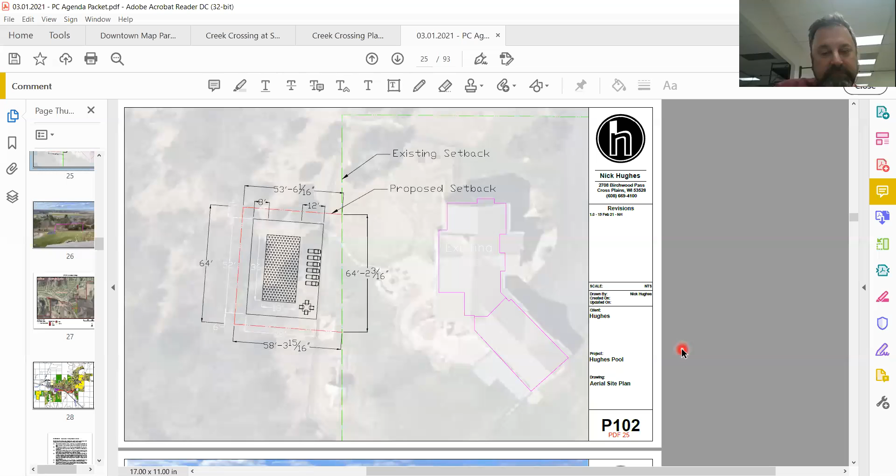Okay, this is just a review process. I guess it's really up to the landowner. I don't know how much more money you want to put into this. Is there anything else you're looking at?

It looks like it's probably lukewarm from the committee going forward with this, and I'm going to agree with Kevin. I think you're going to be surprised how expensive it would be to bring all this stuff into compliance or at least update it. But I could be wrong on that, but generally there's quite a bit of cost to something like this.

Yeah, I suppose it all hinges on the planning commission and the village board. And if it's not something that makes sense for either of those bodies, then I understand that.

Is this something we want to vote on? Well, it's a conceptual plan, so you don't necessarily have to vote on it unless you feel strongly about it.

The next official step would be for the property owner to decide whether he wants to submit an official application. He can take the comments received today and attempt to submit an application reflecting the current concept plan, or he can make changes and bring it back, or choose not to file.

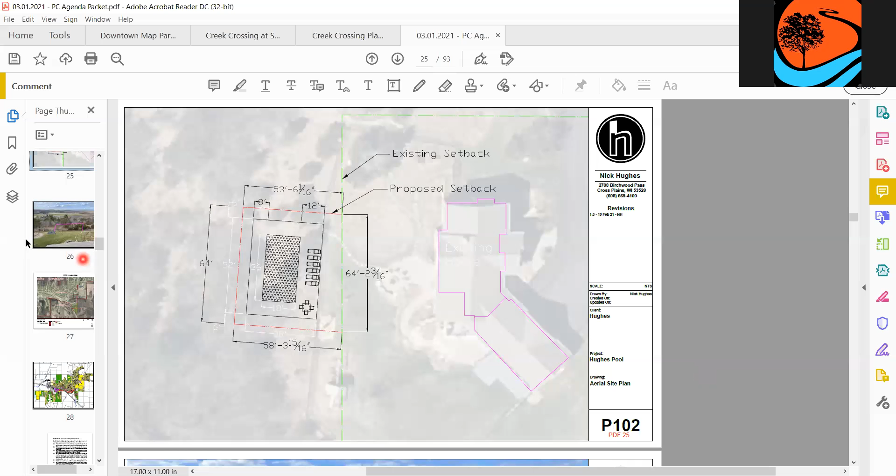Cliff? I'm kind of mixed up because the pictures aren't really giving me a good view of the landscape, how steep it all is around that area. It does look like you're trying to push it out and utilize more of the conservancy space than I think you need to. But the pictures aren't really giving me a good idea. I could probably be convinced if I could see that it was necessary to go that far, but without knowing that, I'm kind of not in full favor of it.

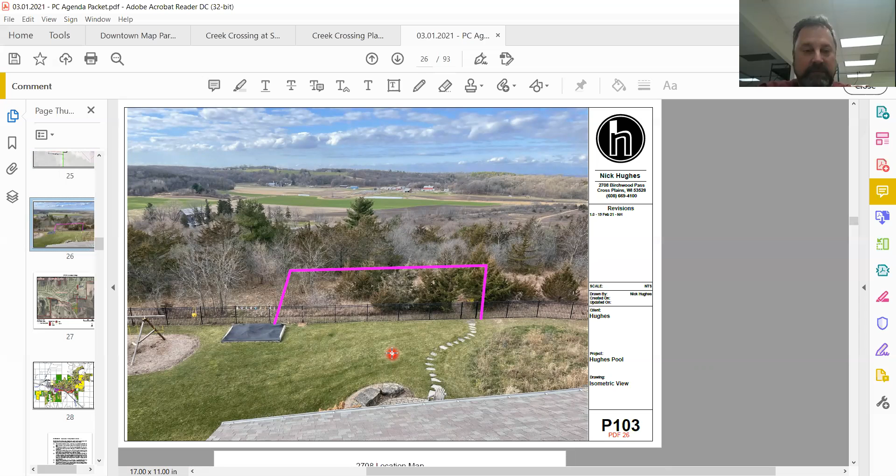Okay, thank you. Eric? I kind of agree. I'd like to actually see the land, the elevations, things like that. But putting something like that on a conservancy area doesn't get me super excited. I could be convinced either way though - I don't have really strong feelings about it.

I guess I'm kind of in between. My biggest concern is what precedent this is going to set if we start building into conservancy land. I haven't looked at all our conservancy - are other people going to also want to move in, or is this a unique situation based on the deal made when this lot was developed? Those would be the concerns I'd have to work through to make sure we're not setting ourselves up.

So I guess that's where you heard where everybody's standing. I don't know how helpful that is, but I think it gives you some direction. Okay, yeah, I think that gives us enough. Nick, you and I can sit down with the village planner and discuss this in more detail and what it needs for a potential zoning amendment, which would require a 2/3 vote. Okay, all right, thank you.

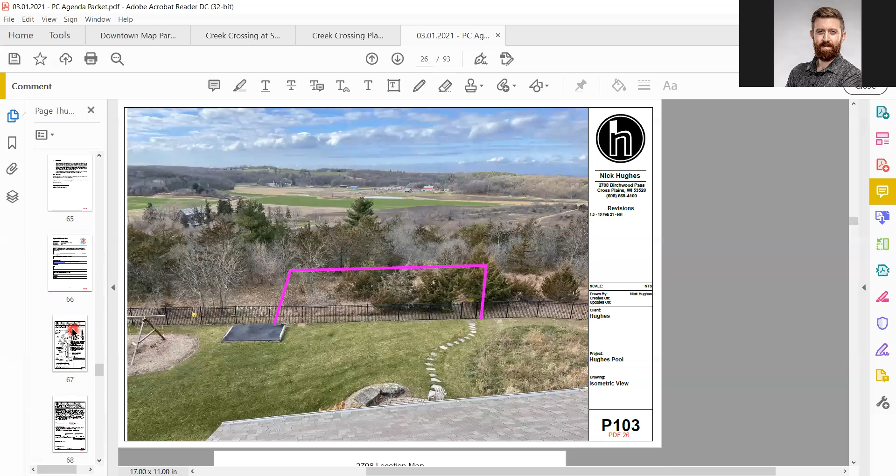All right, we are going to number 5, discussion and possible action regarding Eugene Maier ETJ CSM review. Do I have a motion? This is the one that's outside the city limit. I'll motion to approve it. I'll second. All right, I have a motion and a second.

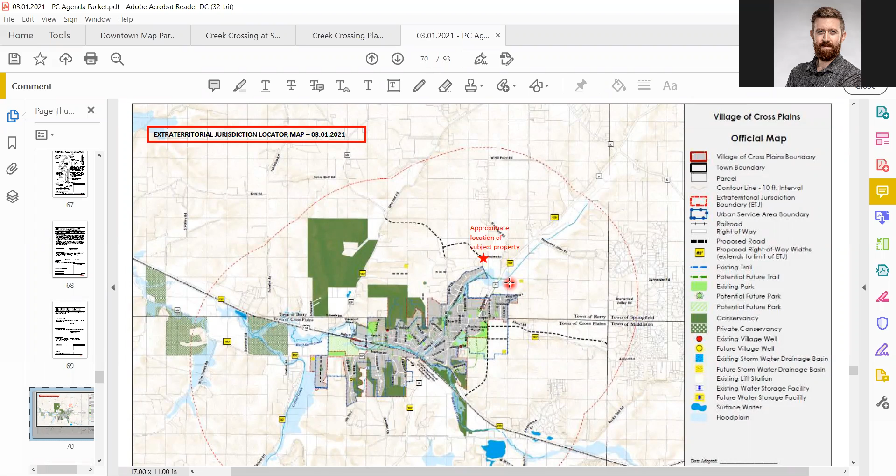Is there any discussion? Let me just get to the page so we all see it's just north of Isabel. This property would be just north of the connection between Laufenburg and Creek Crossing, along Stone Valley Road. Stone Valley comes off Point Road, north of Point Road, correct.

So what they are proposing here is simply to create an outlot in what used to be part of lot number 1 by combining the driveway access to lot number 2. That was one of my questions.

This CSM was previously approved, I believe, by the town of Berry. We have not seen the original survey. The question is whether the outlot change was approved previously by the village or the town. I don't know the answer to that.

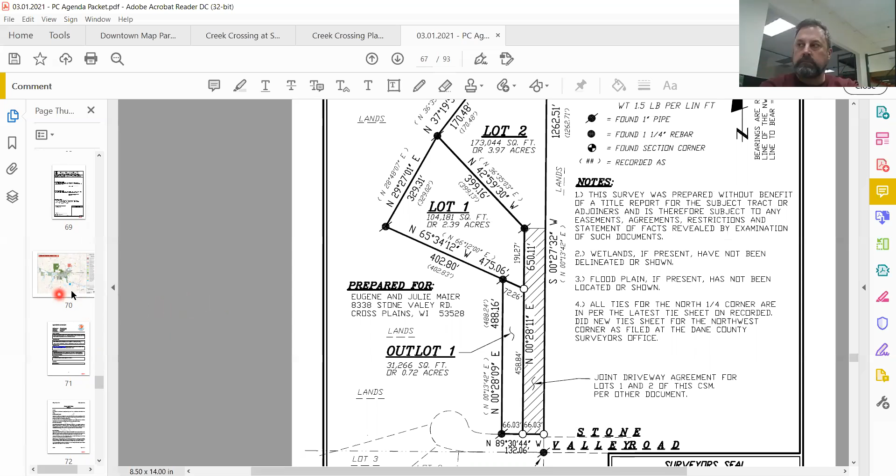We would have had ETJ review of that, and I believe that would have been it. But it wouldn't have gotten to us unless it went through the town of Berry, because we're just signing off on what the town of Berry has agreed to, since it's not within the village municipal boundaries.

I think Kevin's question was in regards to the original subdivision of this. Had that been approved previously? I'm wondering. I think we approved it, but I don't remember for sure. Yes, we took action.

So we're only approving the change, is that right, Mike? Well, they have the ability to add additional lots as long as they don't do more than 4 in any 5-year period. But the request here is really to change an existing circumstance on the CSM, changing part of lot 1 to outlot 1. Is that correct? Yeah. And they have the ability to request that change.

I guess I'm just not understanding why it needs to be an outlot, and it says it's a joint driveway. It's a bit confusing to me.

I believe outlot 1 was the original access to what is labeled as lot 1. Rather than have two parallel driveways, they can ensure that outlot 1 is not transferred as buildable land to another lot, but this would allow them to have one joint driveway serving both lots. This has to do with long-term record keeping about the number of splits and how many additional splits can be done over a period of time. The purpose is to allow for one common driveway rather than requiring two parallel driveways.

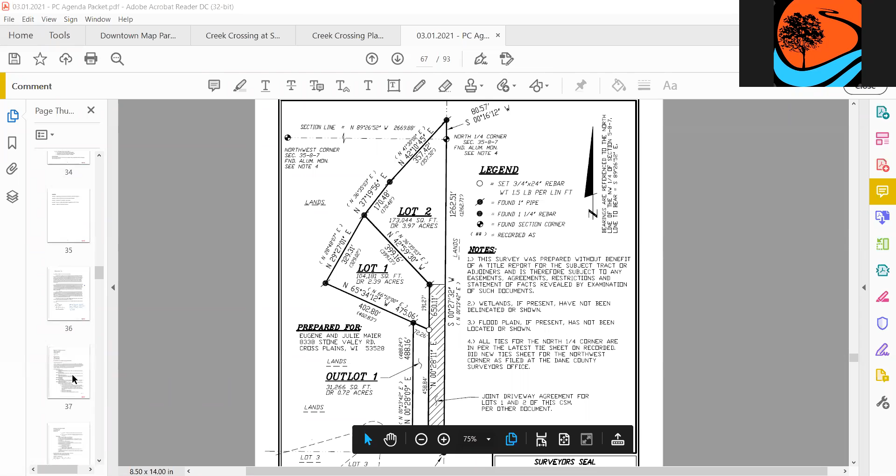Number 6, discussion and possible action regarding the village street light policy. Bill, do you want to go ahead, and then we have Michael here who is lead on this to answer questions.

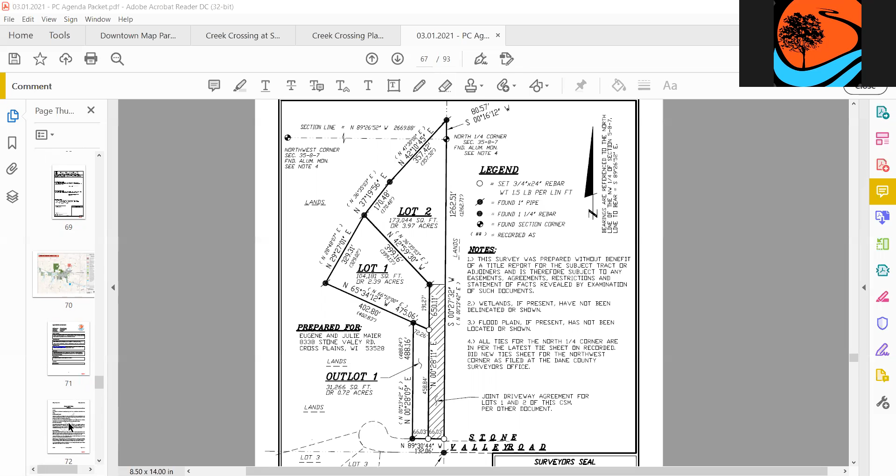In discussing streetlights, we reviewed the village's policy. We didn't have one. This came up because of the subdivision at Scenic Valley, and we had to make a decision on which fixtures the village would like to go forward with, coupled with potentially Creek Crossing and the Sundance development. There was a desire for consistency in a policy for those new streetlight poles, and also for the streetlight poles within the village that could potentially be replaced, regarding light color, light type, amount of light, design, aesthetics, etc. We did draft the streetlight policy, which was included in your packet, along with the approved design for the streetlight pole. We can take any questions.

Well, why don't we get a motion first and then we'll do discussion, so I don't want to get confused. Do I have a motion? I'll make a motion to approve the streetlight policy as presented. Do I have a second? I'll second. All right, I have a motion and a second. Are there any questions or discussion?

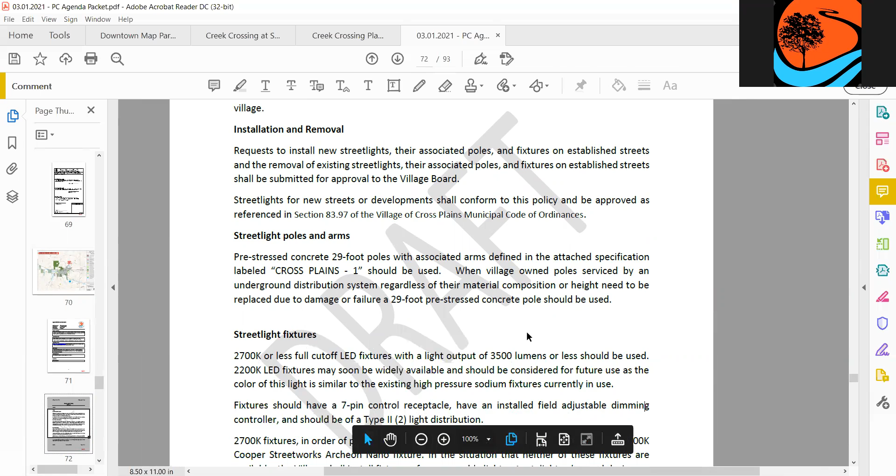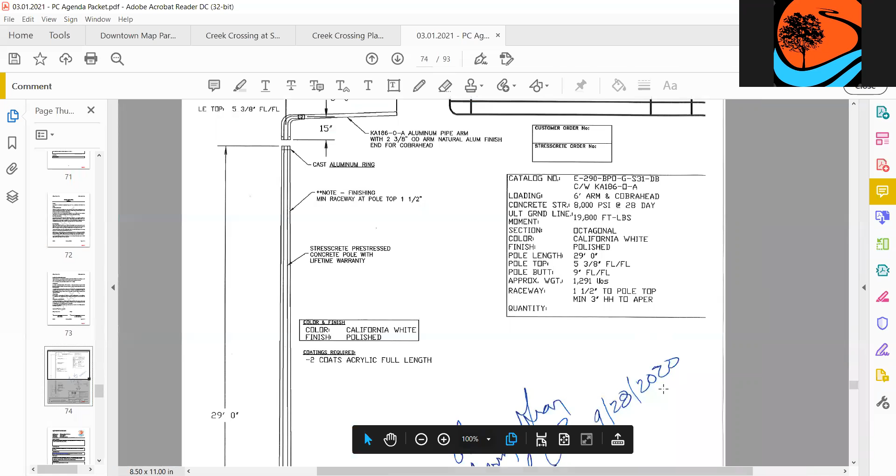I have only one, Randy, and that is the color. California white, polished, that's the color of pole you're talking about. Michael would be able to answer your color question. My comment would be that when I look around at the different poles in the village, the ones that seem most aesthetic are sort of gray, or on Main Street, where this wouldn't apply, there's an exception in the ordinance where they're black. But polished white seems aesthetically obtrusive to me.

Well, those are actually concrete poles, that's my only concrete point. If you look at the new developments, that's what they are, those are the poles.

So they're not painted. The California white is polished, right?

I believe so, because all these concrete poles around the village use the specification that came from Madison, that Jerry Brett got when he was ordering the other ones. If you go to the Meridian neighborhood, it's the exact same thing. They're not painted, I think that's just dealing with the polish, a clear polish on them. It's just the concrete, an octagonal pole. I'm assuming it's not white.

I like concrete and the cut, but I just didn't know what polished California white is. It's probably the first thing you notice on the street, they charge more that way. The concrete poles are designed to last basically forever, and I think they look nice, especially with the octagonal cross section.

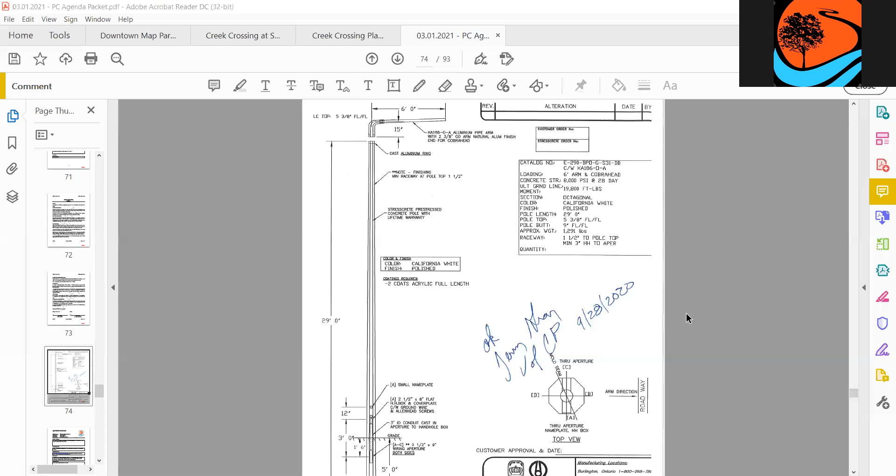All right, anybody else have any questions? All in favor, say aye. Aye. All opposed, same. So moved. Thank you, Michael, for sticking around. Now we know what California white is.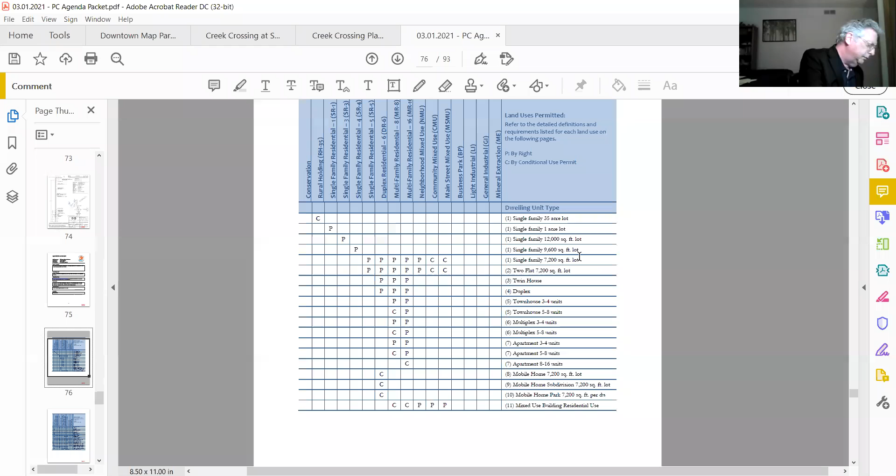All right, so we are on the review of the village zoning. We agreed that we would be dealing with the land use of dwelling units, so the only one we're doing tonight is PDF 76. The idea is looking at these and seeing if we still need conditional use requirements for the ones that have the C. For myself, I thought I understood from Mike last month, but when I got home I couldn't understand the top line.

When I looked at multifamily residential 8, I thought that was an 8-unit apartment, but it's 8 units per acre? Correct. Okay. All right, so if we can just go down to the townhouse, number 5, where it says townhouse 5 through 8 units, and then it's conditional use. It's conditional use because—

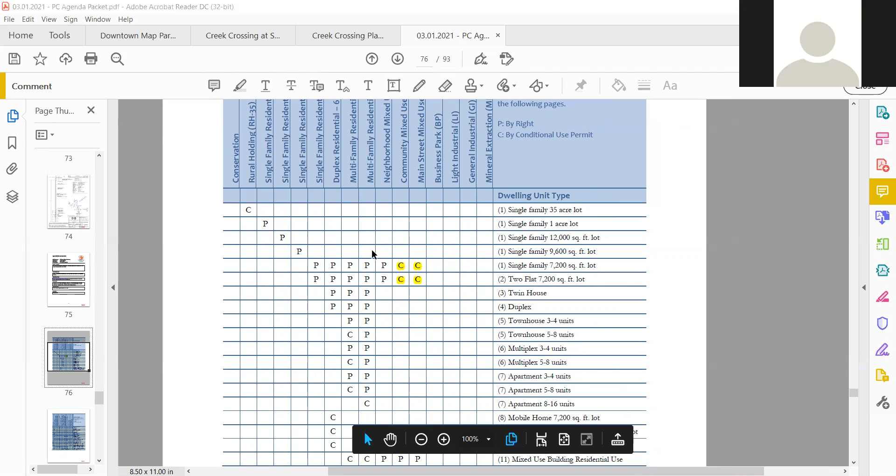So if we look in the line above, if it's a small townhouse building with 3 or 4 units—sorry about that, all right. Let's look at line 5. If it's a small townhouse building with only 3 or 4 units, currently it's permitted by right, but a bigger building, potentially twice as big with 5 to 8 units, would be a conditional use.

And we did that for the other forms of multifamily buildings also. A small multiplex, 3 to 4 units, permitted by right, and a small apartment building, 3 to 4 units, permitted by right. So we wanted to make it easy in the low density multifamily district to do a small building, but we wanted the ability in some instances to prohibit the larger building projects. A good example would be if the multifamily project backed up to single family—you may find it okay to approve a 3 or 4 unit building, but want to prohibit a larger 5 to 8 unit building. So that's why we regulate the larger buildings as conditional uses.

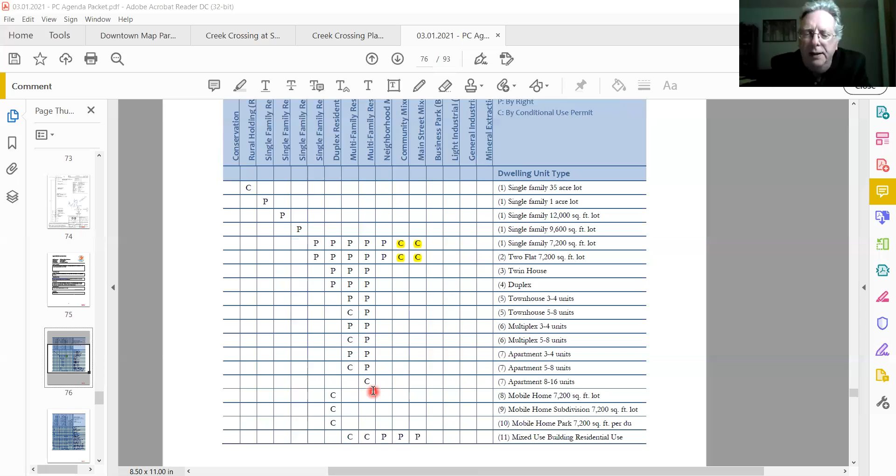All right, unless we remove the C. If we change that C to a P, then they don't have to. That's right, or remove it. We can't remove it entirely. Yeah, but why would we want to do that? Then we're saying we'll never want an 8 to 16. I'm just asking about process here, not that specific one. So we have the ability to either change it to a P or remove them.

You and the village board have that ability.

Okay, are there any questions on this page? Like I say, this is going to be a process, so are there any other questions on this particular page? This is what we agreed we'd be going over. So everybody's comfortable with leaving this one as it is, or are there?

This one to me makes sense. Yeah, further down the line, they don't make sense. Right, this one makes sense. Yeah, okay, all right, in my book. All right, does everybody kind of agree with this one?

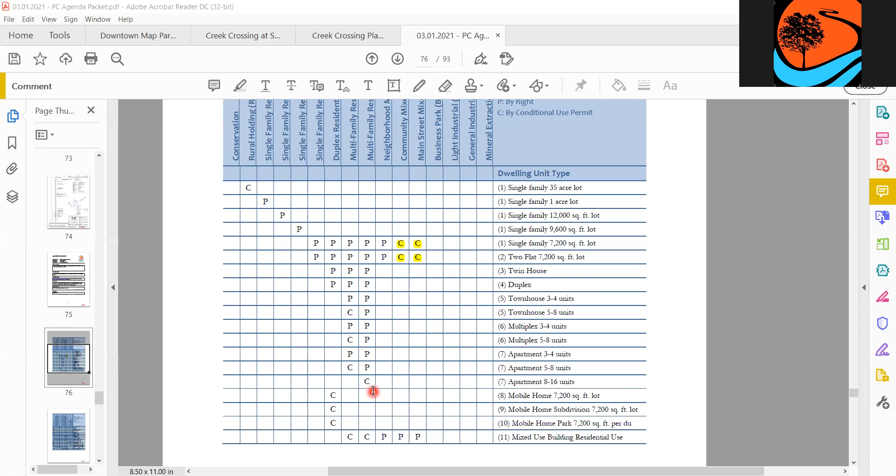All right, so for the April meeting, we are going to go with the next two pages, because I don't think we're gonna need to spend a whole lot of time on agriculture or institutional land. Then we'll go to commercial - we'll have that one and then the commercial one, because that's the big one, I think. Yeah, I think so. Yes, I agree.

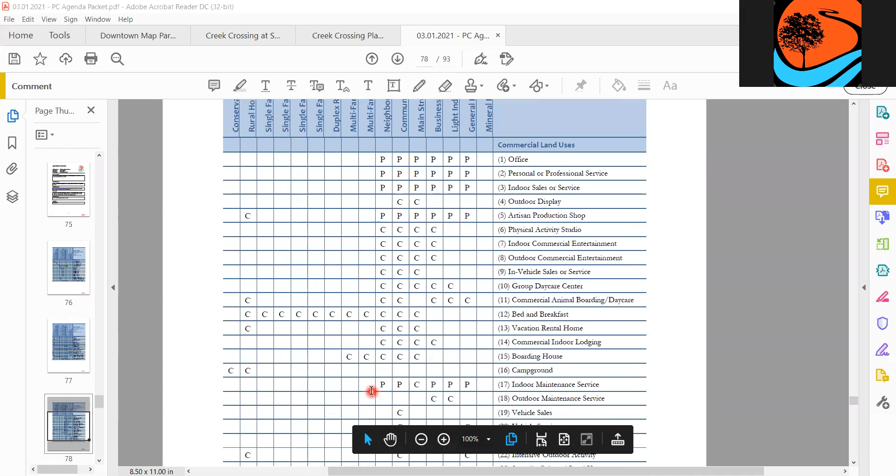I guess I wanna maybe, Jay, ask Mike - these all make sense to me, but asking him if we're missing something, because I feel like there's so many developments and probably see so many of them that... Okay, for page 1? For page 1. Okay, Mike, do you have any recommendations on what you think we might change on page 1?

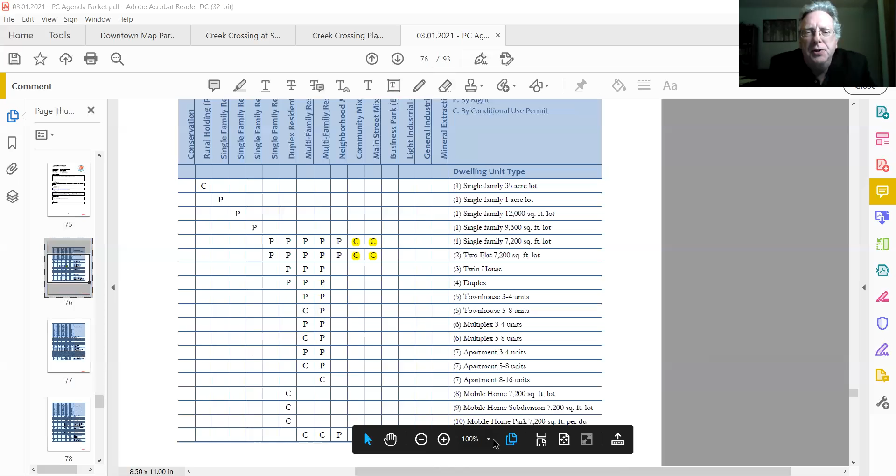On page 1, I want to make sure we're looking at the same thing. So those are the residential dwelling types - Bill has them up on the screen. So I think I want to explain the yellow highlighted ones. I don't know if we've talked about those or not. So that's our community mixed use building zoning district and our Main Street mixed use. So these are the two most common commercial districts. And we've got some single family homes and some two-flats in those districts.

And the reason I'm recommending those be a C is, would we want anybody to build a new single family home or a two-flat in one of those commercial districts if a lot became available? I didn't think so when I put the code in. I thought it would depend on maybe where it is, but I thought you would want to maintain control and maybe have the ability to say no if it was a really good commercial site, and we'd kind of be frittering it away on a single family home that could really go anywhere almost in the village. So that was the reason for those two Cs.

Are you comfortable with retaining the ability to say no there? I certainly am. Yeah, seems like a good idea. Otherwise, I think we're fine.

Okay, on this page, all right, everybody - I was just gonna ask, I mean, in a community mixed use or Main Street mixed use, is there a desire to keep single family in that district at all?

Well, my only concern is we have them there already. And I guess if someone was going to buy one, tear it down and put up a new house, I think they should have that option. I believe that - hey Mike, correct me if I'm wrong, but if it's there already, it would be non-conforming, correct?

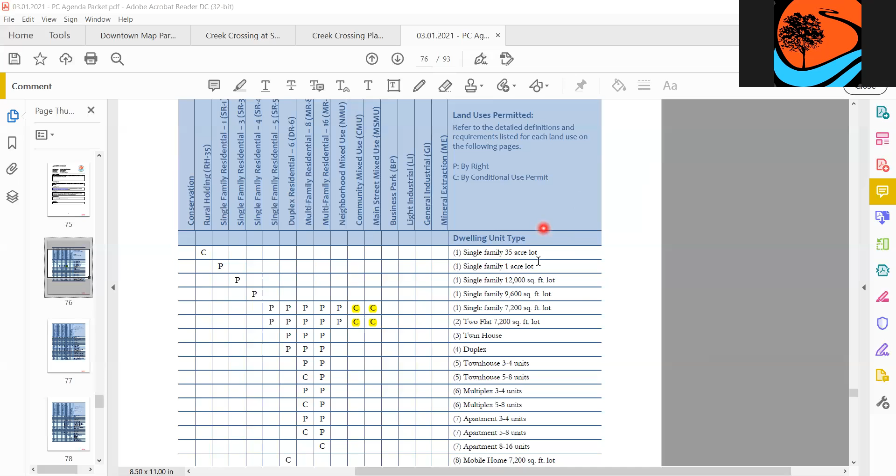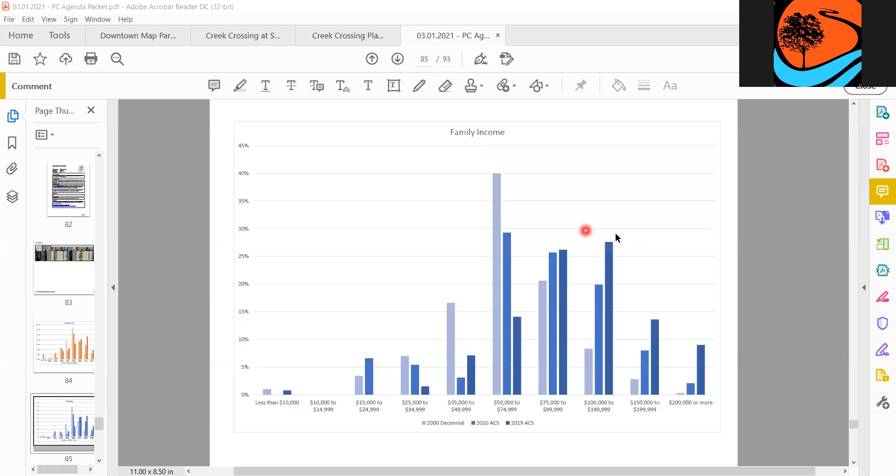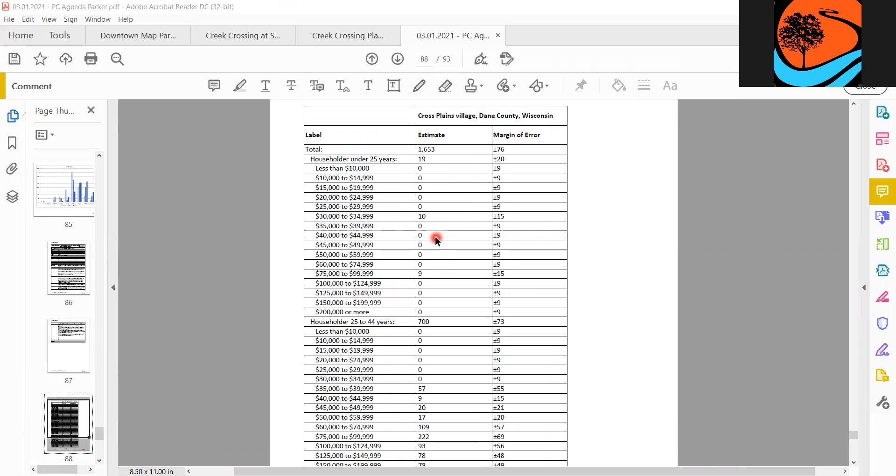This next table is in regards to householder income compared to age. There was some discussion in regards to the need of senior housing. Again, this is not going to answer all the questions, but it starts pointing you to what people are spending on rent and housing.

Go ahead. Could you explain this one just a little bit further? I did not understand this one.

Yeah, so this breaks it down by age category. This is their income per age. So if they're, say, 25 to 44, this is the range of their household income.

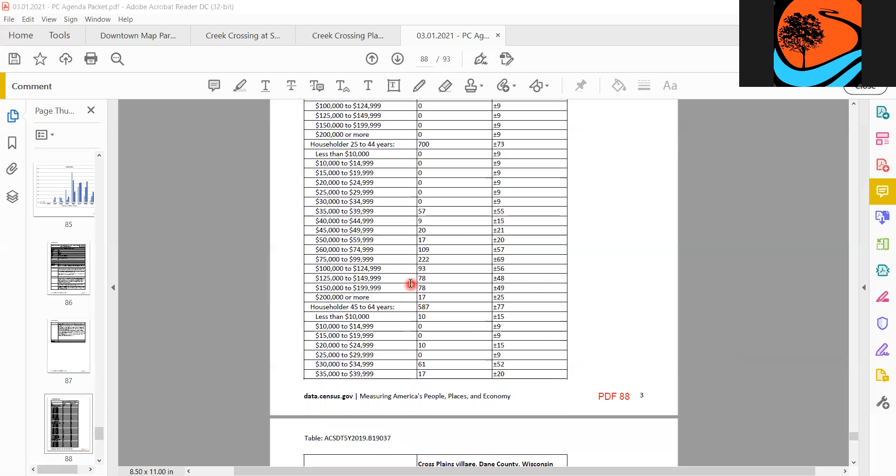This next table shows the rent and how much they're spending on rent, the ratio between rent and income. In regards to senior housing, this is American Community Survey data, so it's not complete, but about 40% are paying 35% or more of their household income, for the age category 65 years and older.

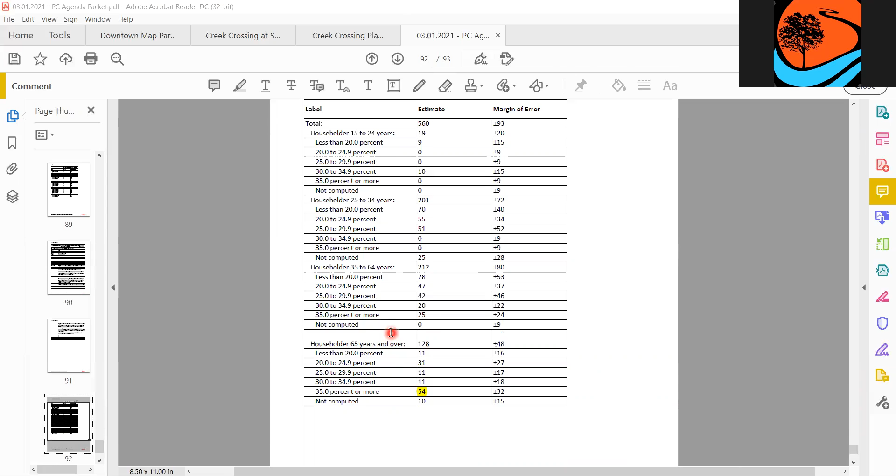And the number of empty lots, as you know, are very limited in Cross Plains for development. So again, that's the end of my collection of data intended to stimulate discussion around land use policy.

Take it from there, Jay. No, I think you did a great job on this.

We're going to continue, and hopefully at every meeting bring some of this stuff up so we have a better understanding of where the village is at. So when we plan and other businesses come, we have some background and direction. That's the whole idea, basically giving a big view of the village. As planned, we're going to get more and more power with conditional use, so it's important to have this background. We always want to spend a little time educating ourselves on the village.